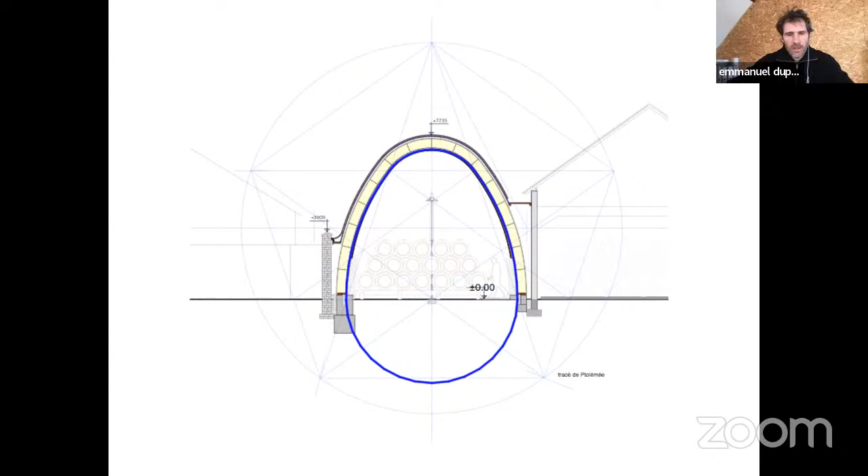To build this vault, we used four raw materials. It means that nothing in the cellar is from an industry. Everything has been made on site, picked locally, and transformed by the hand of man to build the cellar.

So we have wood. The wood comes from around here. We have a lot of forest in the Morvan, which is a region next to where we live.

A straw bale — as I said, winemakers are also farmers, so they have a tradition of growing wheat — and the straw we used is from a biodynamic farm, maybe 10 kilometers away from Puligny.

Stone — the very interesting thing about wine regions is that there are very often stone regions. We're in a way very lucky because vines grow on soil that are made from limestone, so we can use it. It's strong enough to be used in the construction.

And then the last material we use is earth, and that's also from around the vineyards to build. So those are the four materials — very, very simple. With this, and a bit of intelligence, you can build a straw bale cellar.

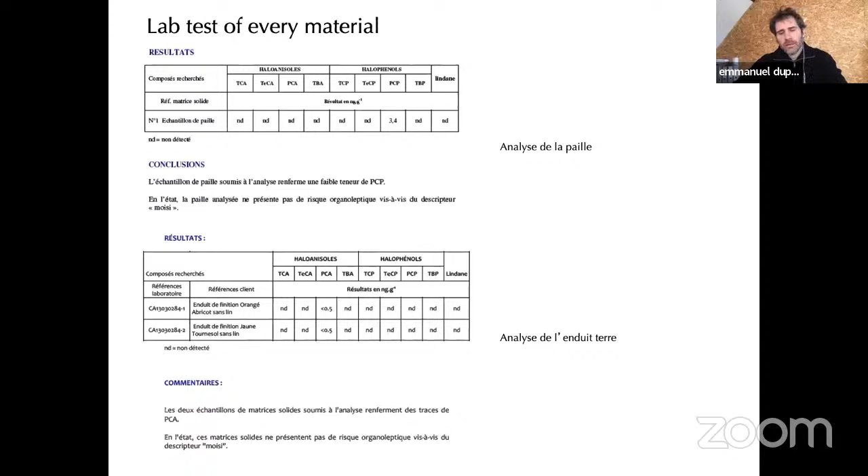Along with the use of natural materials, there's something we wanted to do that has to do with the fact that we have to be very careful of the material we put into this construction: we didn't want to have any glue. It would have been very easy to use glue beams to build those vaults, but there were some problems with glue in the 1970s and 80s because of the components they used, and for the same reasons as explained before.

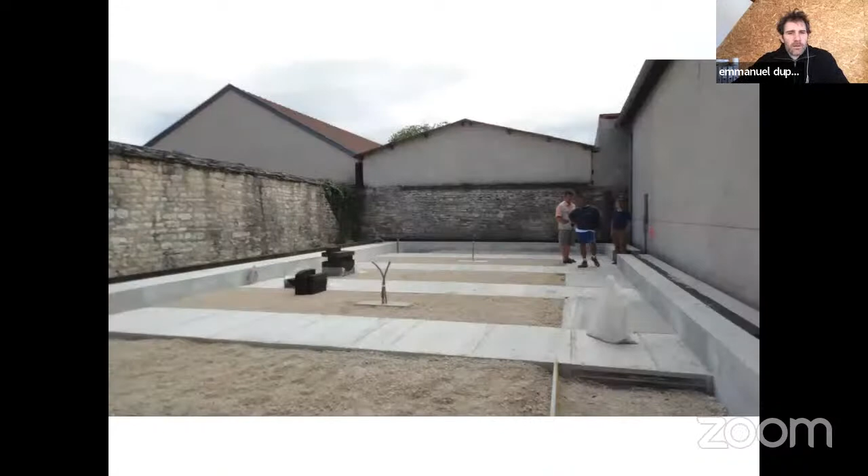So this is the preparation of the site. One of the main principles of the cellar is that it's connected to the earth, so there's no insulation. There's nothing in between the earth and the cellar. As you can see, there are 2 or 3 alleys for the barrels, but where the gravel is, there's nothing, there's no insulation.

So we add a bit of concrete. The concrete we use is a low carbon concrete. We're very lucky here, as the concrete and limestone are made locally, and there are people researching ways to use as little cement as possible in the concrete. So this concrete is low carbon. It was experimental at the time. Now it's actually the law, but 7 years ago, low carbon concrete was experimental, and this was one of the first buildings using it.

The other thing we're using, you can see on the side, is cork insulation surrounding the base of the building. It's another material we use a lot for insulation within the ground, because it replaces foam, a petrol-based material that uses a lot of energy. This cork insulation comes from Portugal. It comes from a bit far, but less far than, let's say, the other side of Earth. And it's quite efficient, it doesn't suffer from humidity. So this is the base on which we've put the arches.

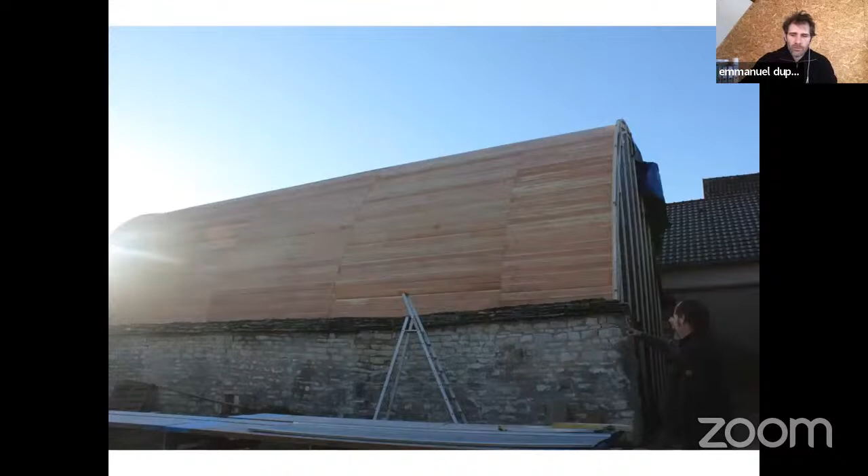So that's the arches being built, and then on top of it, we've put this wooden layer, which is going to be the support for our external layering.

So this is the guy checking the straw. Once it's checked with the lab, and it's checked also for compression and humidity, we can close it up and go to the next phase.

So we're building a cellar. A cellar is very different from what architects do usually. Architects usually make buildings to be heated. This is a building which is supposed to be cold. The buildings we build normally have a very low percentage of humidity, and this is going to be a building with a very high percentage of humidity.

So we have to protect the straw bale, which is the reason why you have this blue breather membrane, which has an SD of 150 meters, if you want the technicality. It means it's a very closed breather membrane. It doesn't let the vapor go through very easily.

This was another challenge for this project because usually breather membranes that are this closed use a lot of foil. But what we didn't want to do is build this egg and then have a foil layer on top of it, because you know how Faraday cages work—if you have a foil cage, then our whole story of energy converging to the center is not going to work anymore. So we had to find this breather membrane, and we had to go to Germany to find it. So it's quite important.

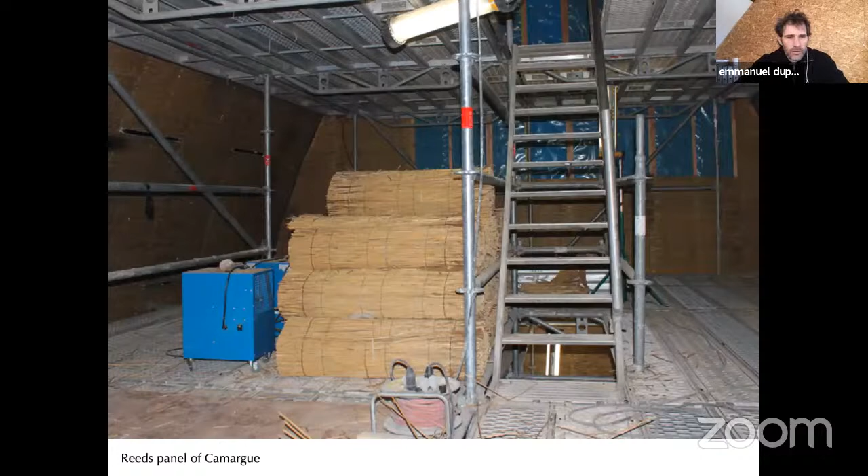So what you see are reed panels from Camargue, which is a region in the south of France that specializes in reeds. Those are going to be the support of the earth render for the finishing of the cellar.

Those were a challenge to find as well, because reed is probably the plant that sucks up the most pollution. So we had to refuse maybe 2 or 3 batches. Every batch was tested on site.

So the reed panel goes onto a wood structure, which is in front of the breather membrane, and will be the support for the earth render.

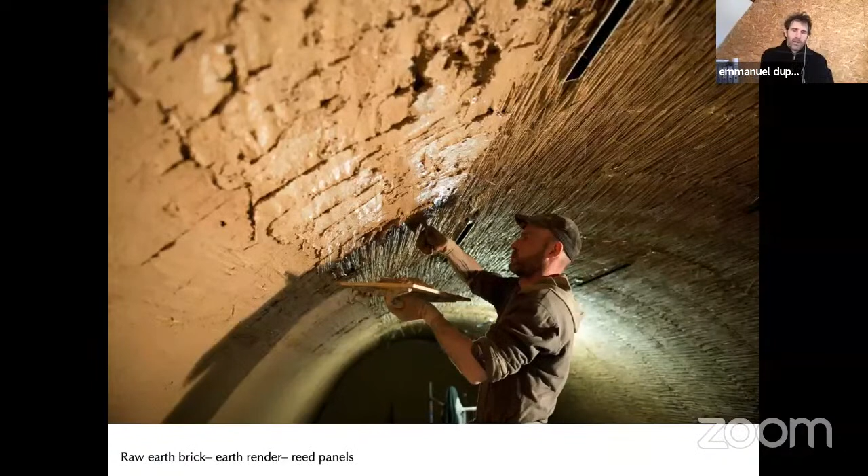The earth render is here for two reasons. As I say, it's a very humid place, so you have to regulate the humidity, and the earth render is probably the best material to do this because it sucks up the humidity and then brings it back when it's dry. That happens also in the compressed brick, but a bit less. It's the earth render which is probably the most efficient.

You can see the little ventilation on top of it. Those are the little ventilations that allow the air to go down. So they go up by the brick underneath and then down at the top of the walls.

So this is the guy doing it. It took them about 6 months to do the whole thing, which is quite a long time. There's just two of them.

What he's doing at the moment is putting the base layer of the render, which is about maybe 3 or 4 centimeters thick. And he's going to apply the finish on top of it.

And the guy that does it is this guy, Ludovic Mej. We've been working with him for a long time. So he's a guy from here. What he does at the moment is he's taking some clay from the site, which is just near the egg cellar, and he's going to formulate the render.

It's just for the finishing, because otherwise it will take too much clay. And you can see we did some experiments on the color. Those are the colors that we can get with the clay on site in Puligny, and then we chose it with the client. It's very interesting, because it means that you're taking the material from the place directly into your building. So it can't be more local.

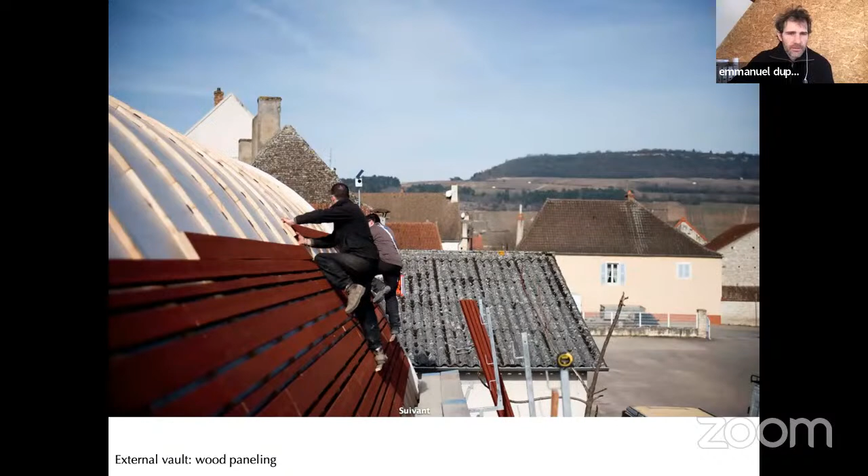So the outside cladding is made of wooden board that also comes from the forest. You can see the forest in the background. So it's not that forest, but it's a bit further away. And it's a painted cladding, painted with a paint that we formulate ourselves, that we make ourselves. Well, it's the carpenter that makes it.

There's a tradition in Burgundy. You would think that it's a Norwegian thing to do, but in Burgundy as well we have it, and I'm sure over in Turkey we have the same. There's a tradition of painting wood to protect it, and they had recipes for this paint which are very easy to do.

And this is the carpenter doing it. So Marion is on site checking it. The paint, it's not much - it's just flour, linseed oil, soap from Marseille, and then to have the color, it's the red ochre.

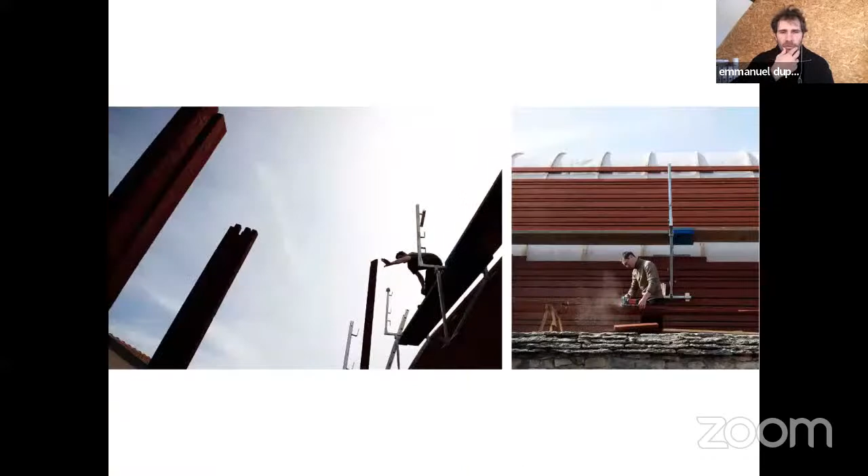Just to summarize a bit the way this egg-shaped cellar is done: you have the outside layer, which is the board, the wood cladding. Then you have an air layer. Then you have a very strong rain membrane, so that there's no humidity that goes into the tanks. That's very important. Then you have the straw bale, the air layer that I talked about, and then the earth render.

You can see this a bit - it's in French, but that's it. So it's 13 layers. So when I'm saying it's very simple, the materials that we're using are very simple, but the way you put them together and the order in which you put the materials together are very important. Every layer has an importance, has its task, and they have to be at the right place. When you deal with natural material, that's the constraint you are in.

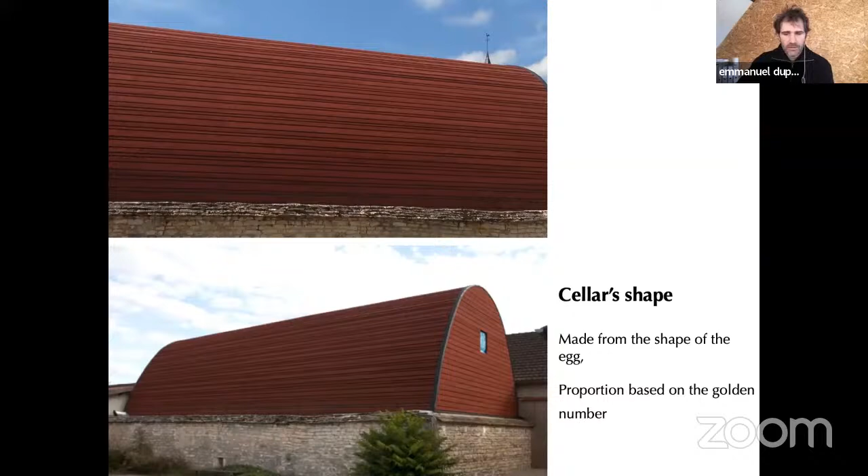There you go, that's the egg cellar with the guys working in it. And that's the outside. So it's a very small project, but it's rather iconic. There's a lot of work put into this.

What we're trying to do now is put all that I've said, all that we're experimenting in winemaking and construction and farmer construction, into more public-based projects. We're building a kindergarten in Chalon-sur-Saône, and our thinking was: why are we taking so much pain in building constructions for wines and testing every material, and not doing it for a kindergarten?

So what we did is, in the competition that we won, we wrote it down that every material should be tested, so that all the kids in the building don't smell or breathe materials that are not good for them. What that did, very interestingly, is that when we started the studies in this kindergarten...

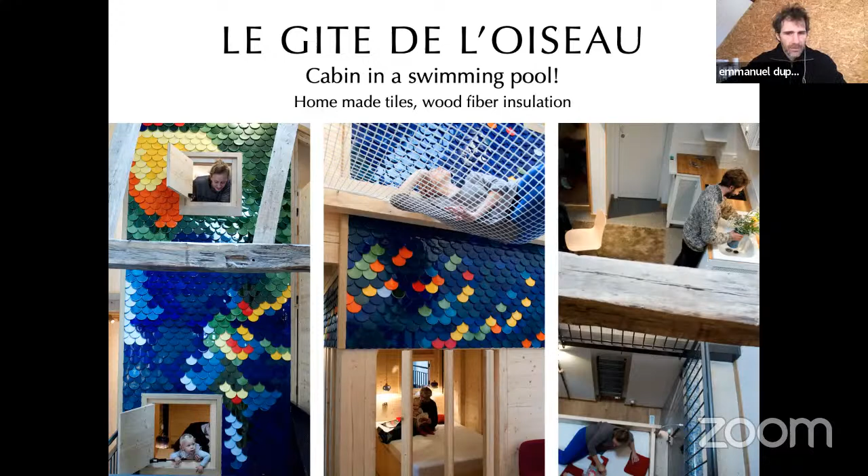So those tiles were handmade. This is me sorting them out. Handmade in a factory that used to make plates around here, it used to be a huge factory that made loads of plates, but not anymore. They had a very small activity, and we went to see them and said, 'Do you want to make tiles for us?' And we made those tiles for this project. Very local, it's plaster. And now the activity starts again because they're doing other small decorative objects like this.

There's a huge challenge of how you insulate. Those buildings weren't made to be insulated, they were made to be just a stone wall, you had a wood fire and that was it. But with the comfort we're used to now, we have to insulate. With the challenge of using less energy, we have to insulate. So this was one of the challenges we tackled maybe 5 or 6 years ago. What we did was insulate with an earth render, to try and have both the insulation and the render inside.

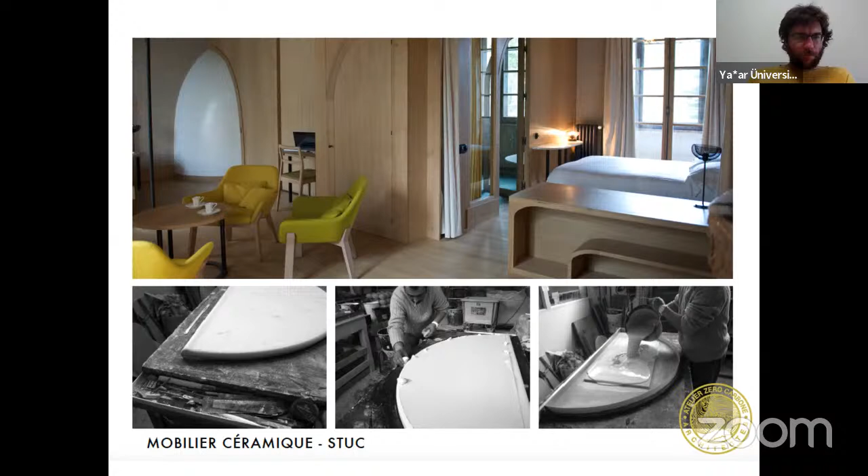This is another project. It's called Les Thermes. It's a bathhouse that we made from an old garage in Chambertin.

The inspiration for this building is the impluvium that you used to have in Roman times. You have the compluvium—you can see them with the bronze on top—and then you have the impluvium underneath. It means you have the rain that goes through, and the atmosphere when you're taking the hot bath, which is the egg-shaped bath you see at the back.

The interesting thing about this project is that all the materials are raw, but kind of luxury. So you have the stone, the bronze, the wood, but nothing has been industrialized in this building, and it gives you a sense of aesthetic for the building.

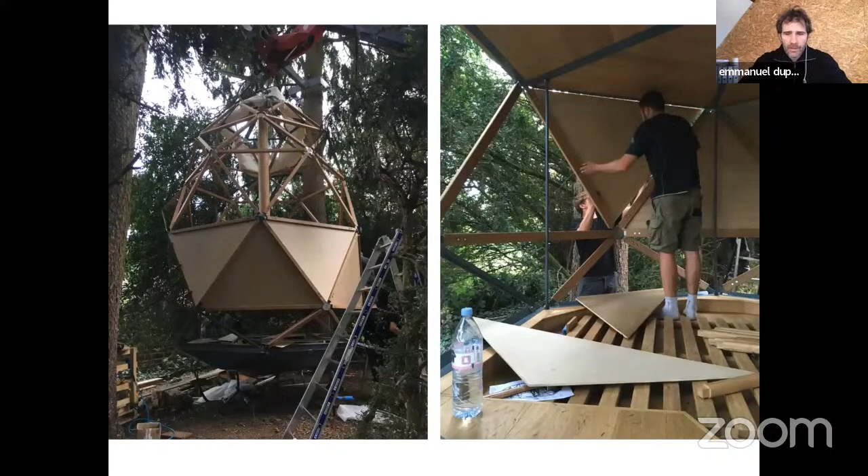We wanted to have the same effect on this cabin. So what we did is design this object, made of a geodesic structure of oak tree, with a bit of metal for the structural part to hang it up, and then we put a tent over it.

And then we had those wings made that open up with the heat and close up with the cold. It means when it's very warm, it opens up and lets the air go through, and when it's cold, it closes up and the air goes through less.

This was made because we found it's very funny actually—we found this system in warehouses where you grow vegetables. You have those big warehouses with windows that go up when they need to ventilate, and go down otherwise. So it's not something we invented, but we use it for a place where people can live.

There you go, that's like a pomme de pin. And then maybe another fun project. I'm going a bit faster.

Another project is this Cocoon Cabin, which stems from an old technique, maybe from the end of the 19th century when there was a big industry—the technique of very, very thin glass tiles on a metal structure.

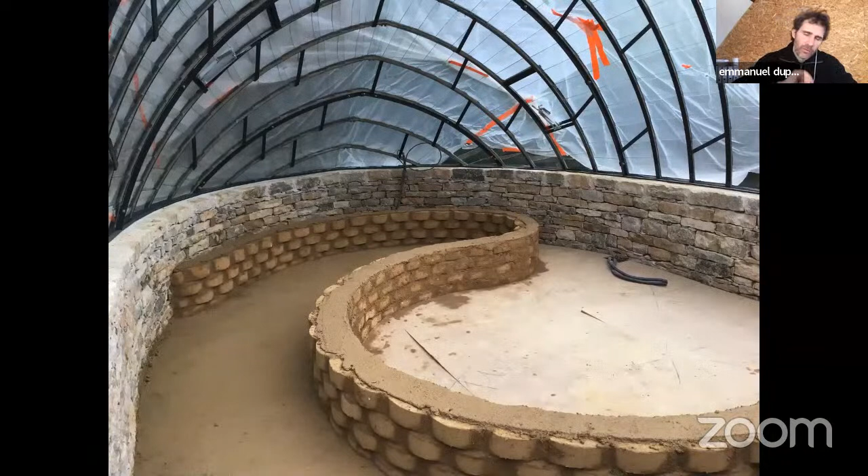The idea of this project is that it's a double layered cabin. You have a first layer, which is protection from the rain, which is this glass house. And then you have another layer, which is this base that we built, where it's all made of earth, and that's where you have the warmth. The soil is made of earth, the base is made of earth, the dome is made of earth. It means you have a very cozy atmosphere inside, protected from the rain, because we use only raw earth. So when the rain hits it, it would be catastrophic. So you have to protect it.

We actually made those bricks ourselves. We made ourselves a few molds made of zinc, and then we made the bricks. That's someone from the practice, Boris, making bricks. It took us about a week to make all the bricks. So what you do is put them in, and then you just let it dry. It's a very, very simple technique. A lot of people use it in North Africa, maybe in Turkey as well. In France, it's been completely forgotten, so it's starting to come back. It was interesting for us to do this.

Clay, mainly clay. So there you go. You have the earth, an intimate little hut where you have a bed, a little heater, and then you stay there overnight.

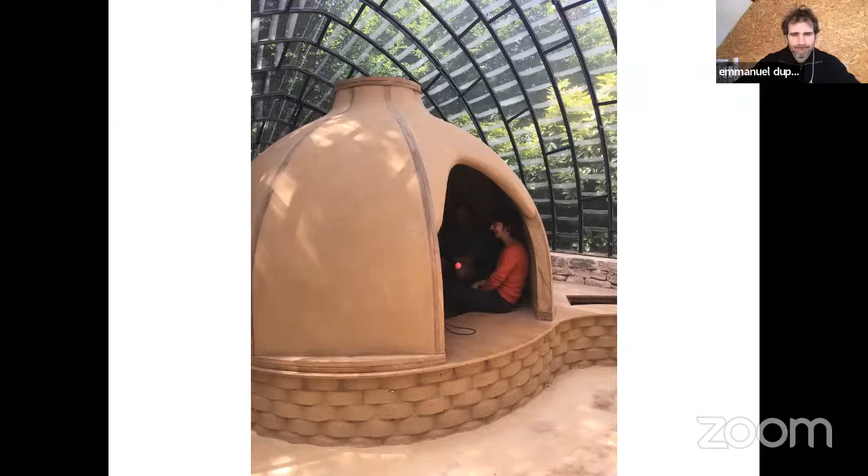Another experiment. So you know how we use straw bale in all our buildings, usually in frames, like the egg ships. What we wanted to experiment on in a small building is structural straw bale, which means it's the straw bale that holds the roof. We're not the first ones to do this, but it's not very common, so we tried it.

So what you do is pile up the straw bales and then compress all the piles so that it becomes so compressed it becomes structural. The idea is that you use even less wood, only straw bale, and you also avoid any thermal bridge because you have no structure. So it's wonderful on paper. It's a rather heavy technique, but it's pretty efficient because you have the straw bale, then you have the lime render outside. It's a lime earth render. You have to put some lime, otherwise the render is going to wash away.

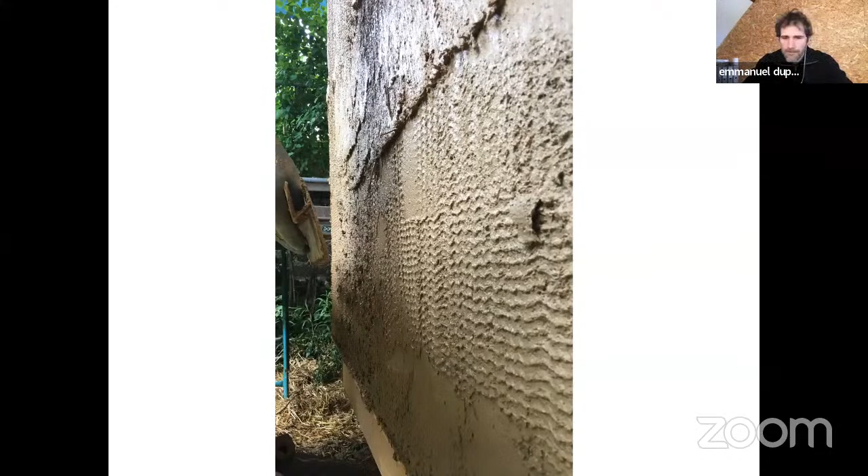You use local guys - this is our roofer and our wood maker. What's interesting is that in France we have the Compagnons du Tour de France, guys who have spent their life learning their craft. But the only place they usually get to use their craft is in patrimonial or conservation buildings - churches, mayor's offices, etc. They rarely get the occasion to use their real know-how on other buildings. When we come and say 'you're going to work on a straw bale house like this,' does that interest you? They're so happy, and they have a way of thinking that helps you a lot on how to put things together, because they know the material. You really shouldn't underestimate this - if you want to be sustainable, you have to work with these guys.

So we have an earth render, which is inspired by a Japanese render on reed. The Japanese are really strong at this work, but they're not the only ones. There you go.

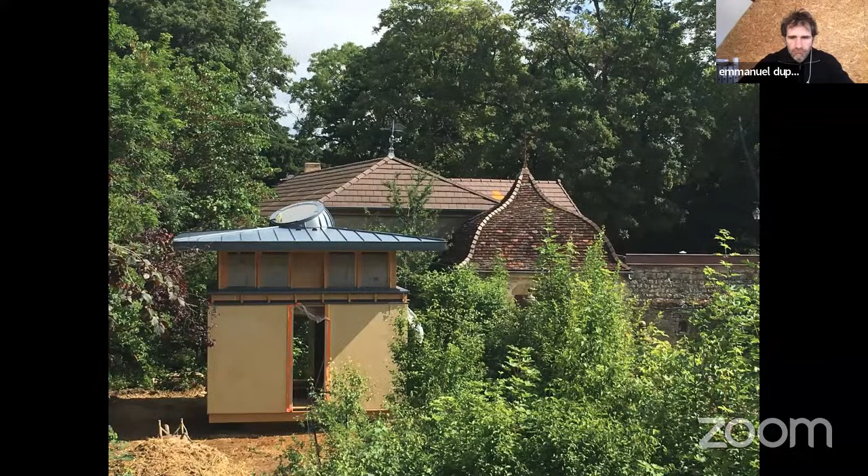Okay, I'm going to maybe wrap it up. This is just a small one - another project we could talk about. It's a tasting room which is suspended in the air, in a building in Chambertin. Nothing special about it, it's also a straw bale insulation. The only thing is, you should have fun when you do architecture, or at least that's what we think.

There you go, I'm going to go through the inside. This illustrates really the way we want to work: the hand has to be near the material, and then the material does your architecture. I'm just going to finish.

So I'm just going to finish on something I did maybe three weeks ago. We were invited to Saint-Pierre-et-Miquelon, a small island on the other side of the Atlantic, which is actually part of France - a French department. We were asked to go there because, unfortunately, Saint-Pierre-et-Miquelon is going to be submerged, meaning the sea is going to rise on top of it, at least on the island of Miquelon. That means they're going to have to move the village, because the village is on a small isthmus, maybe a small beach - which is interesting, because the village is where the sea is going to rise, and so it becomes the new village. We've been asked to go there and help them move the village. The reason they asked us and other architects is that this is a result of climate change.

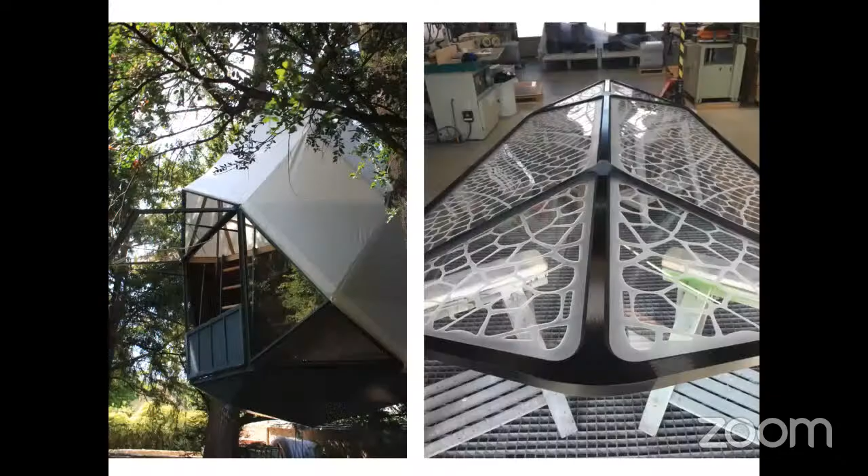Actually, I have two questions. The first one is about the glass cabin—I was wondering how you managed to join the glass tiles to the metal structure, and how you dealt with the runoff rainwater on that one. And for the—yeah, that one, exactly, not that one, the one after that. Yes, this glass cabin. And the second one is about the straw bale cabin you showed us. I was wondering, I know you didn't use any tie beams, but did you use anything like metal wires, for example, to bind the straw bales?

Okay, tie the rows, I was wondering about that. Well, first question for the tile, for the glass tiles.

Yes, it's actually very, very simple. We call it a mastic - I don't know if you have this. It's like a paste, water based. So the tiles, you just put one on top of the other, like normal clay tiles. The metal structure has a little edge on which you put the tiles, and then you apply the mastic, like a paste that we all used to work with. It's called macun in Turkish. Maybe it's like Crystal Palace putty - I don't know in English, but I know it in Turkish. So that's the first answer, and then for the straw bale...

So this guy here, you're talking about, for example, the white line that you see. Yes, I see. Okay, so there's no metal - well, there's a metal base on which we've put the walls, because as you can see it's slightly suspended in the air, so to do this we had to use metal.

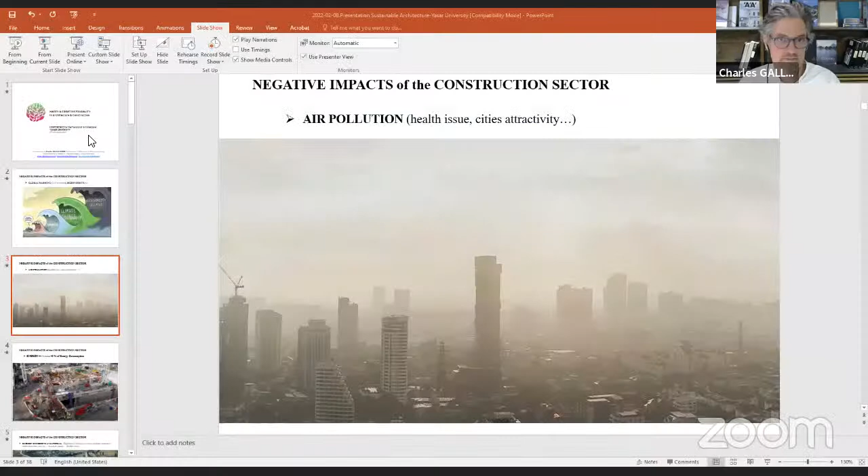I'm sorry I couldn't participate in the previous conference, so I don't know exactly what you talked about, but I just heard the end talking about frugality and sustainable architecture. So let's continue, but this time in Asia, Southeast Asia.

I put this title, Happy and Creative Frugality in Architecture, because this is a group of persons who constitute this new movement, let's say, and I'm the representative for Vietnam and Cambodia. That's why I would like to introduce this movement to the students in Turkey, because it seems there is no group in Turkey yet. So maybe it's a good occasion to create a group for frugality.

Before that, I will present two projects of T3 Architects, my company in Vietnam. I would like to remind of the context, even if we all know about it, so I will go quickly on it, but it's important to get this information in mind.

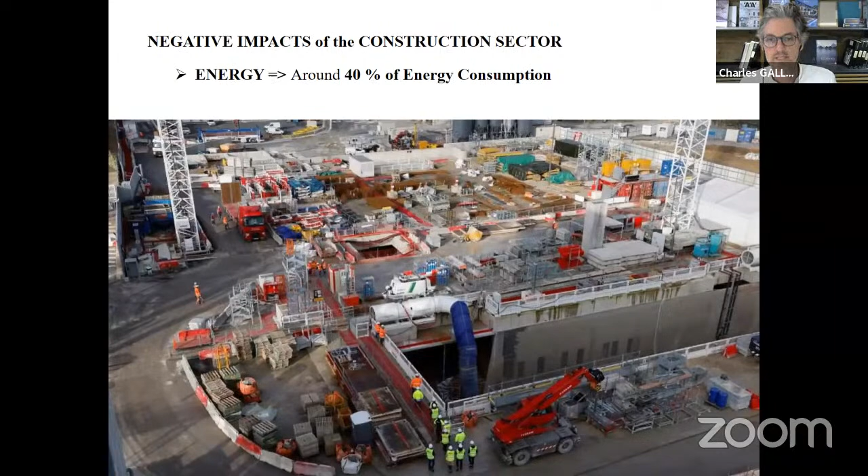Then, in terms of negative impact of the construction sector, there is also the carbon emission of the material itself. When you choose a material, you have to keep in mind that you need some energy and some carbon to produce this material, to extract it, to produce it, to transport it to the construction site, then to build, then to demolish the building after 50 years, and then to recycle. All this needs carbon, produces carbon emission. So the challenge now is how to reduce the carbon emission and try to make low carbon buildings.

During rainy season, which means 4 months per year, we have flooding, and it's worse and worse, even though the city is now very modern with many good facilities. Because of urbanization, we don't take enough consideration to preserve the natural soil. When there is a big rain, the water rises quicker and quicker, and now some streets are underwater sometimes.

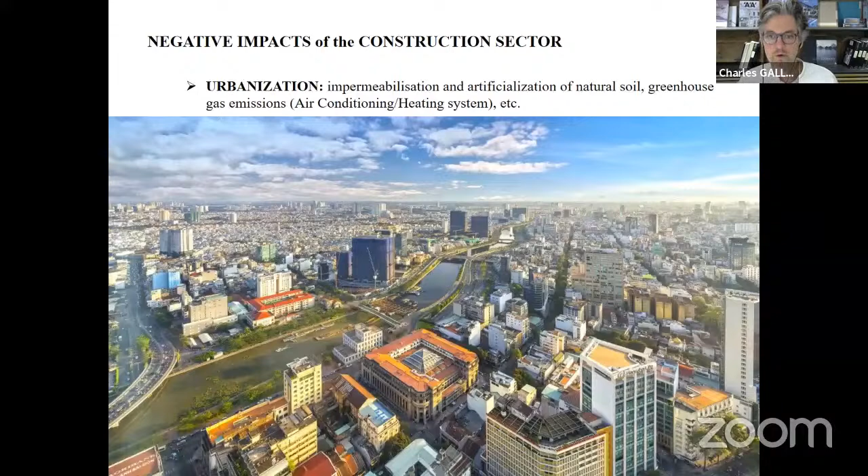Then the last negative impact I would like to mention is what we call greenwashing. Today many architects, many investors, many real estate people will tell you, I do green buildings. But if you look in more detail, it's not green at all, except a few plants on the balcony or some solar panels on the roof—but that doesn't mean your building or construction is green.

You really have to be careful and understand what real sustainability or low carbon building means, and avoid going for this kind of fake green architecture, which is everywhere now on the advertising panels of real estate developers. And I'm sure it's the same in Turkey.

So what we want, the new approach, is to go for a more sustainable approach, and to build cities and architecture that are more sustainable, and also more desirable. It's important—it's not only a question of engineering, it's a question of making a city where you feel good, where you have pleasure to live, and where you don't suffer to live there.

So the transport will need to work properly. The air quality should be nice. You need many parks and green areas to go out and enjoy with your friends, etc. And then also bringing the frugal approach—it means doing more with less, generally speaking.

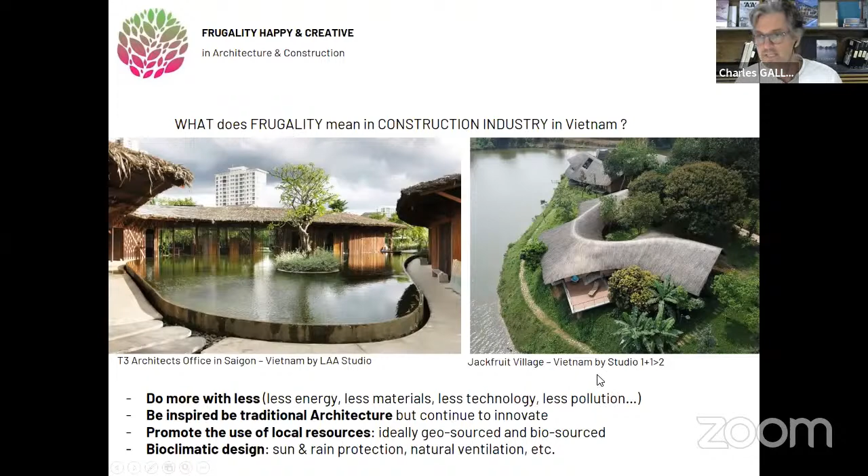Okay, perfect. In France you have a group of frugality in every province, and now, I read recently, there are 8 international groups. So we are one of them, but maybe Turkish soon, or maybe it's done already - I don't know.

Those three people - one is an architect who was always involved in sustainable architecture. Dominique is more a teacher, between France, Germany and around Europe, promoting sustainable architecture for 20 years already through magazines, books and conferences. And Alain Bornarel is an energy efficiency engineer. So this collaboration allows this movement to be quite powerful, and I hope it can grow all around the world to change the mindset of architects and make buildings more sustainable. That's the goal for all of us.

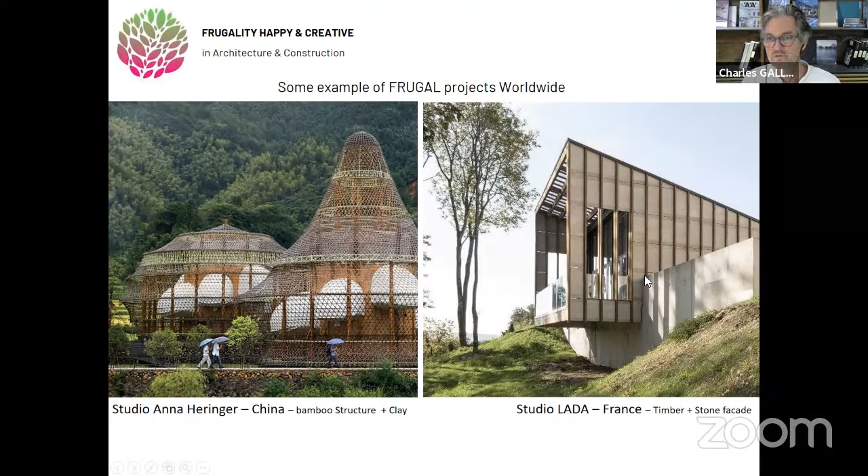It's a very contemporary architecture using wooden structure from local wood, not wood coming from another part of the world. Then they use stone to make the facade, a local stone. Of course, you can use a little bit of concrete where it's necessary. We don't say you cannot use concrete or materials like this, but you have to use the minimum concrete possible and only where it's necessary. If you don't need it, just use biosourced or geosourced material.

All the insulation of this roof was made with rice husk, the skin of the rice. We use 20 or 30 centimeters of rice husk to insulate the roof. Another project from another studio, doing a house in the countryside using only local bricks, which allow natural ventilation and decent comfort even under a tropical climate.

Just some examples of frugal materials you can find in Vietnam. Some clay, which you can find everywhere in the world, but you have to study carefully the clay you use and how you make your walls with it. This is the rice husk I was talking about, which we insulate with in Vietnam.

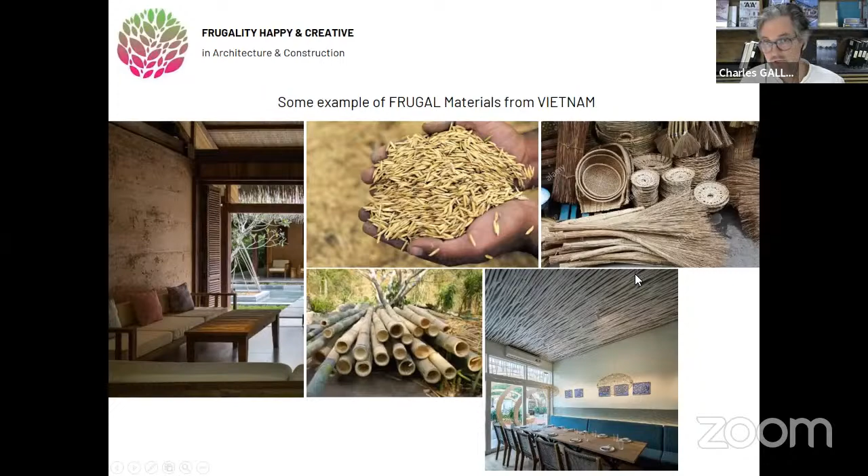Now I will focus more on two projects we did with T3 Architect. One is a dormitories project to welcome students, and another is in Saigon city center, an office building. Very contemporary, but using only natural material. So I will show you.

I'll start with the dormitories. This is 40 kilometers from Saigon in the countryside, but the city will grow around, so it's still countryside, let's say. The owner has the house here. It's a family, French-Vietnamese, living in Vietnam. They have some horses here.

Here they have a place, a kind of restaurant with a pool. They have a small eco lodge with bungalows over a pond. And here they produce some clean, drinkable water. We just built this small building to welcome international and Vietnamese schools to make green classes for a 3-day trip, where they spend 2 or 3 nights. They have many programs around sustainable construction, permaculture, farming, etc.

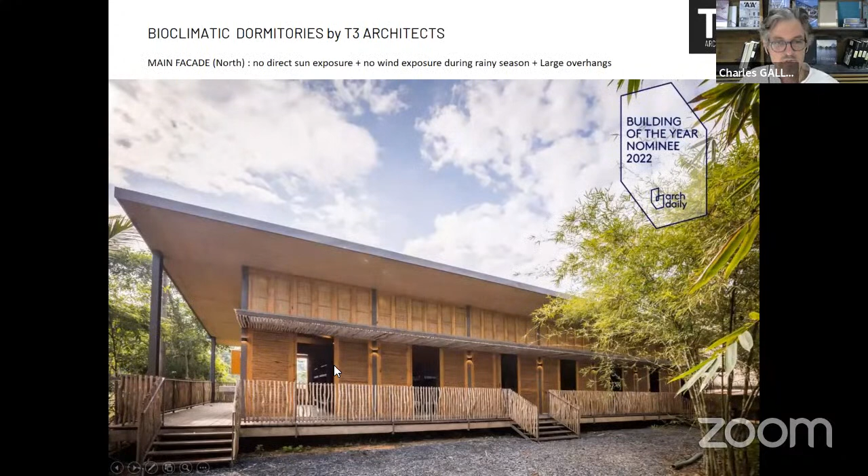This is the goal of this project. So we are in... I'll just continue. This is the main facade from the ground floor, let's say. Just for information, we've been nominated this year on ArchDaily, even though this project is frugal, very simple, and even low cost. So just to show you, you can be on the biggest architecture website with a very frugal approach. This main facade is the north facade.

We put the main facade on the north just to avoid getting light. In France or Europe, you try to get light from the south, but in Vietnam it's the contrary. You try to avoid direct light, because if you have the sun, it means it's very hot. So we are on the north, where you never have direct sun on this facade. And we have a very large roof to make sure the sun never touches the facade, so it's always under shadow and always fresh. We even add a pergola here to make sure at any season of the year, the sun never goes inside the building.

As you can see, all the rooms - 1, 2, 3, 4, 5, 6, 7 - have a double facade with openings on both sides. This creates a natural airflow, because one facade is always more hot than the other, so naturally it creates airflow through the building. I think I have a section to show. This wall, which is south, is sometimes a little exposed, so it's a little more hot, so the fresh air from the north goes through to the south. During the night also, the airflow can happen. So it's very important, when you want natural ventilation, to have two opposite facades with openings.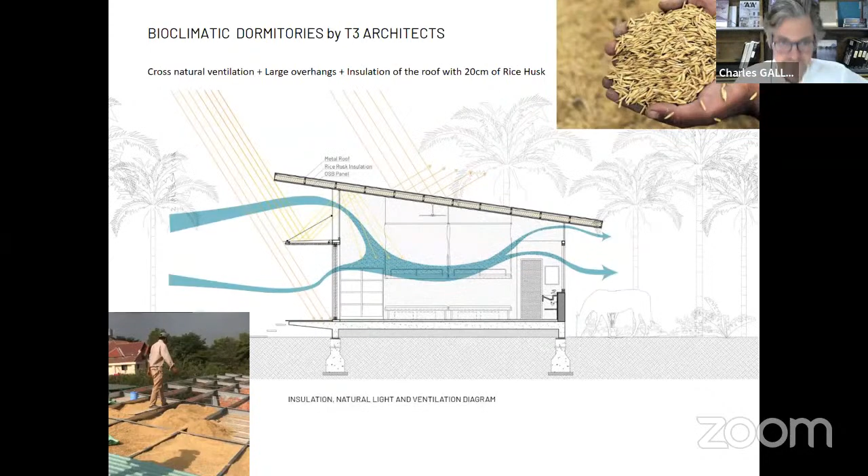So this is the layout, quite simple - it's for students, so 4 bunk beds, 8 people per room, with some toilet, some sink, and some shower, and cross ventilation through the building. Then we have a terrace all around just for enjoying outside.

You can see the back facade - always we use a wooden frame and bamboo, and you can ventilate your bathroom and have the view of the landscape, of course. Of course, we kept all the bamboo and the trees around when we started construction. We didn't cut any trees.

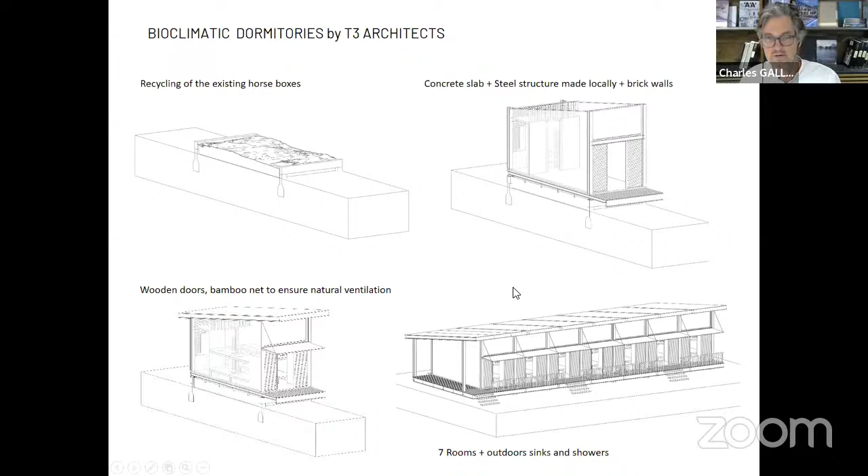And you can see how we did it. We had to demolish some existing buildings, as I explained before, so we kept those destroyed bricks to make the building 50 or 60 centimeters higher than the natural soil to avoid flooding. Then we built the steel structure and some brick walls, then the facade, then the pergola and the roof, and then we duplicated it 7 times because they wanted to welcome 2 classes - around 50 students plus teachers. It's very successful now - all the schools of Saigon are going there to spend time and discover this part of Vietnam.

Inside, you can see it's very frugal also, just a concrete floor.

So it's very fresh when you walk on it. So you use the concrete where it's useful. As I told you, it's strong. You can keep it for long. It's resistant to water, and it brings freshness inside.

And then all the rest, the walls are covered by lime plastering. So we don't use cement, we use only lime and sand. And the color of the sand gives the color of the wall in the end, of the plastering.

And then we design some beds in bamboo because there is a lot of bamboo in Vietnam. There are many types of bamboo, so depending on what you do, you use the right bamboo. For furniture, this one is good. And we always try to avoid adding chemicals, so we try to avoid any treatment with chemicals even on the furniture.

Then you can see we use only dry toilets, so no water. Even if you have 8 people inside, it works very well. So we build the box, and then you have some rice to put when you go to the toilet. And then you have a door on the back side, so for operation, the owner and the team can open it without going inside the room and take the box once a day. And they use it for the compost, then they do agriculture.

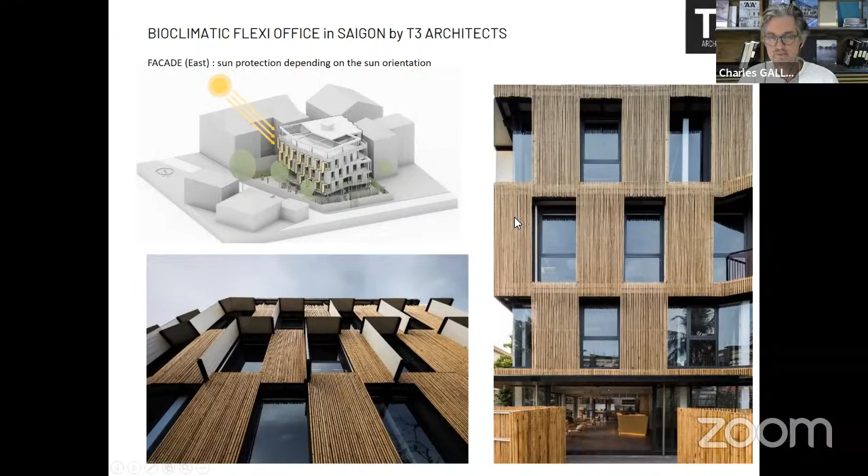Some other picture. And here another big challenge we want to bring to this project is, before you had a full glass facade with only 2 small doors. We told the client, let's create a nice garden around the building again. So we break the concrete floor, we break it to plant many plants, tropical plants. So it was at the beginning, but now the plants grow very quickly in tropical climates, so it's already much bigger. And let's keep the ground floor totally open.

So let's remove the air conditioning of the ground floor, and we just preserve the cross natural ventilation by keeping the windows totally open. You can just close a few hours per year. So it's sliding doors for when there is a big rain and you really need to protect the inside. But normally we have even a roof here to make sure, even if there is rain, there is no rain inside.

So you can see other pictures. So we work again with energy efficiency engineers to prove to the owner that we don't need air conditioning. He didn't believe us from the beginning. He told us, no, it's too hot in Vietnam, we cannot. We say, don't worry, we have three floors above. It is a very good thermal insulation to get 3 floors above you. Then we get this additional roof, so there is no sun inside your building.

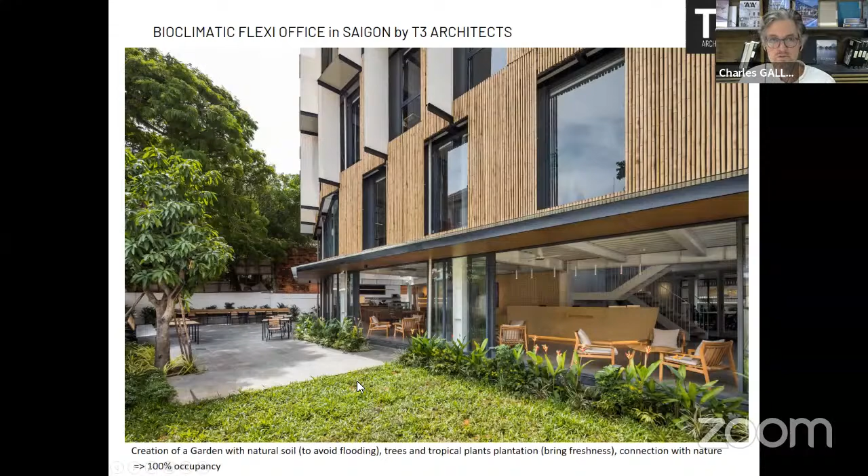So even we did also interior design. We not only do architecture. So when we do interior design, we promote local material. So the ceramic tiles are produced in Vietnam. All the tables are made with solid wood. It's not fake wood. We even go to antique shops to find some old furniture, and we renovate to make the coffee shop, for example.

Then the existing structure was there. So of course we keep the existing to save energy. If the structure is there, we keep it.

Just to show you also, we try to bring some natural material inside a modern style building. So it creates some contrast between modernity of the steel structure and some walls with lime plastering again, only lime and the sand will give the color of the wall. So you have some texture on the wall. All this is made by wood, solid wood, and rattan, made in Vietnam as well. And all the decoration is from a local craftsman to promote local know-how.

And the goal is also to make proper air quality inside the building. So we want to avoid using chemicals. So even if we use plywood, it's plywood with grade 1, so with a minimum of chemicals inside. Whereas most projects use MFC wood, you know, the panels with a powder of wood full of glue and full of chemicals. So we don't use it anymore, even if it's cheaper.

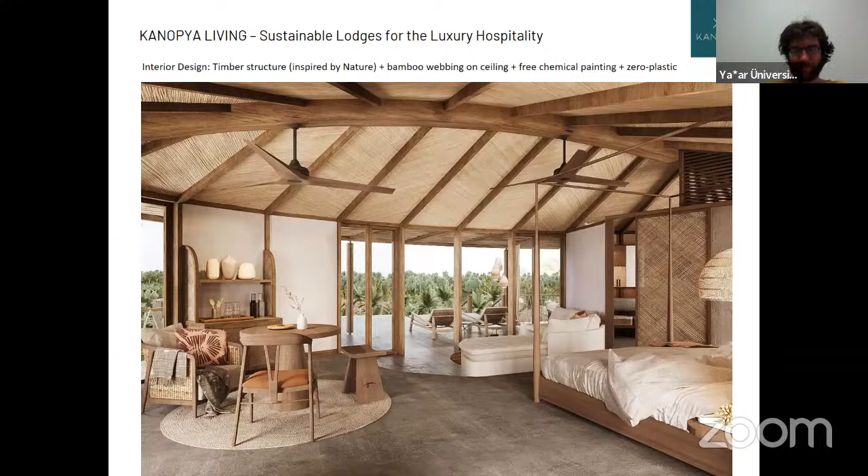No. Second conference, yeah, but there were not more questions than the first. It's usual. So I will ask then.

One of the questions I had was about the compost toilets you're using in the dormitory. The owners accept it easily because they chose it, but for people coming here, do you know how they feel about it? First time they are afraid of it, but once they use it one time they realize there is absolutely no difference, no bad smell. And because you don't need to manage it afterward, everybody is happy with it.

Some international schools come here with kids who pay a very high cost for school fees, and they are all happy to use these dry toilets. So no problem at all. Good to hear, because I'm not sure any of the students had heard about it before. It's more psychological - you say oh, it's not clean, but when you use it, you realize there is no problem, and you don't use water. That's the main difference. In certain countries it can have a big impact - when you are missing water, it's a good way to save water. I don't say we can use it everywhere, but if it's properly managed and designed, I think it will become more and more normal.

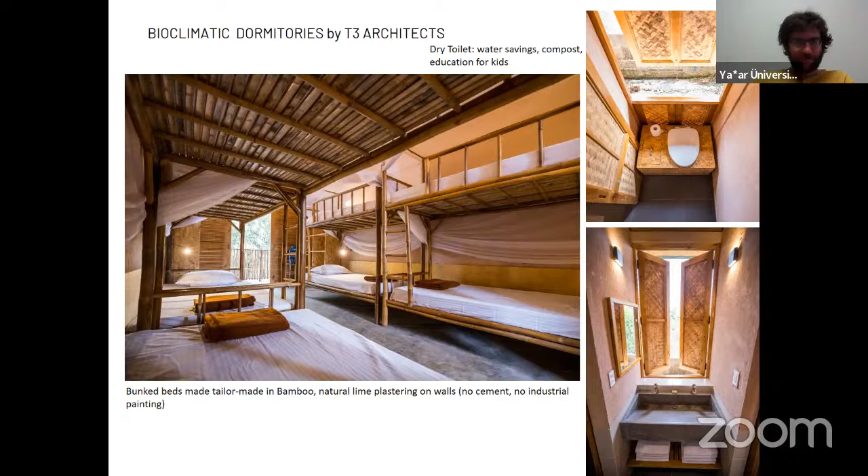Gokab, you can ask your question please. Hi, first of all, thanks for your presentation. I'd like to ask - you designed a second roof for all the luxury resort buildings in the last pages of your slides, but the outdoor toilet didn't have one. What about the solution for that?

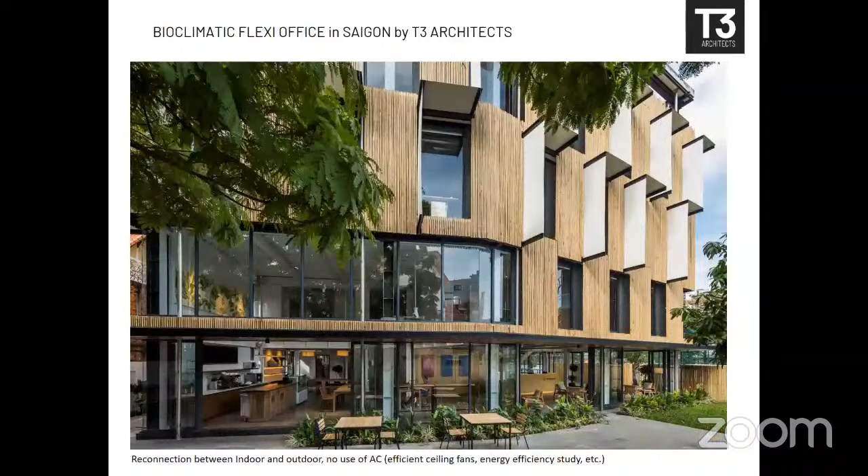I'm not sure I understood the question well, I didn't hear it clearly - this project has an outdoor toilet? You mean the main building has a second roof for covering the facade, but the toilet doesn't have one - what's the solution for that? To cover the facade - for the toilet, the rain doesn't come here.

In 5-star resorts now, people are looking for a special experience. So if there is big rain, okay, you have 5 meters to go, you take an umbrella and cross the bridge - it's part of the experience. People will pay 1,000 per night for this. So no worry, they accept to play the game. Usually when there is big rain, it doesn't last too long, so in the worst case you just cross a few meters.

No worry, but we can imagine creating a pergola or something to cover it. The client didn't request it though, and I think it's a good experience. In our office now, when we go to the toilet, we go outside, and when it's raining, okay, you run, you make exercise.

No, we just use the existing ones. We study carefully the existing structures. I will try to show you. We had this kind of concrete planters. The first idea of the previous architect was to put plants here going down, but with the irrigation system, as I told you before, it was maybe a bit too high tech. It means you have to consume energy to put plants, and during dry season the plants will die for sure. During rainy season you will have too much water and the plant will also die. So we just said, okay, let's remove—we keep the planter but we don't plant anything—and we use this to attach the bamboo facade on it, a vertical bamboo facade.

And then for each window, we try to get a nice design to protect every single window as much as we could. We studied with software like SketchUp, or even basic software, where you can see at different seasons where the sun is coming from, and you just calculate the size of the shading to make sure there is no sun coming inside.

So I think every project after should have a different approach. And we did—I have many others, of course, to show—where we use ceramic tiles on the facade, produced in Vietnam, for another type of project. So the main idea is which kind of material to use for which purpose.

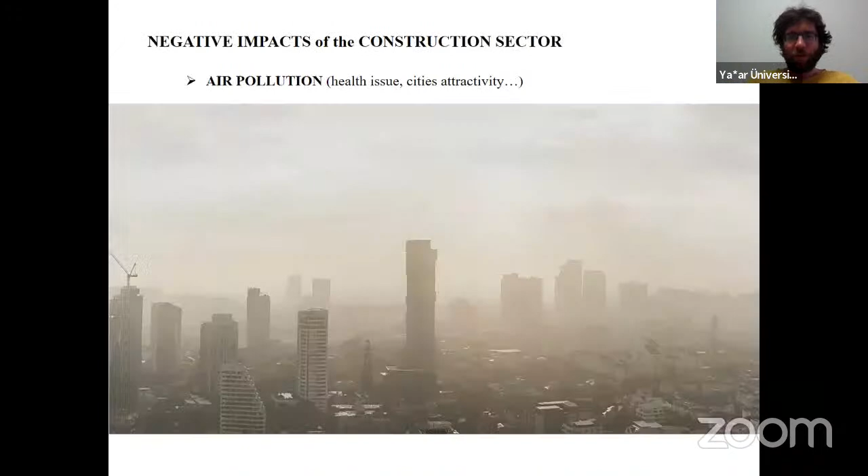Görkem is asking about bamboo and insects—is there no problem with insects like termites or anything?

Yeah, so that's why for every use, if you need bamboo, there are, I don't know, 100 types of bamboo in Vietnam. So for the one most resistant to insects, we took one quite resistant naturally. Then either you put it in the mud for a few weeks to make sure the mud kills the insects inside the bamboo, or you burn a bit of some part of the bamboo to remove insects, and then you put a low layer of protection against insects and sun. So we took a bamboo very resistant normally to be used for facade, and then we have a small layer to be insect repellent.

So a little bit of chemicals, but only outside, so there is no risk of having bad chemicals inside. But we took the right bamboo to make sure it will resist well. If you took the first bamboo you find in your garden, of course it doesn't work—after 6 months it disappears, eaten by termites and mushrooms and any insect.

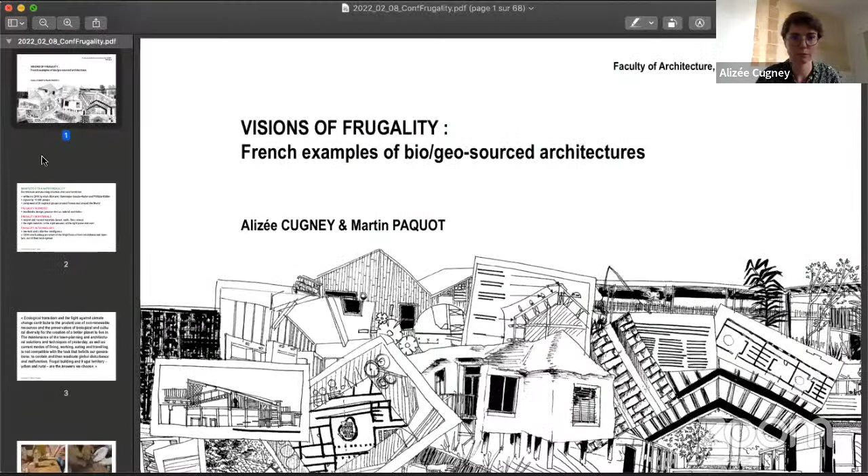We are going to talk about mise en scène analyses. You see, so maybe at the beginning we don't have the right pace, but we will find it at some point, I think. The title we found with Martin was Vision of Frugality, French example of bio and geosource architecture.

But first, I was asked to say a few words on the frugality movement that started in France, but also around the world. Actually, it started 4 years ago, almost day to day, when Alain Bornarel, Dominique Gauzin-Müller, and Philippe Madec wrote a manifesto entitled Manifesto for Happy Frugality, Architecture and Planning of Urban and Rural Territories. Their starting point was that, of course, you know it, I believe.

Construction, in a broader sense - building, road, infrastructure, and everything - contributes to global warming, pollutes the air and the water, artificializes the ground, and produces a lot of waste. So what we are doing as architects is actually a big part of all the environmental issues of today.

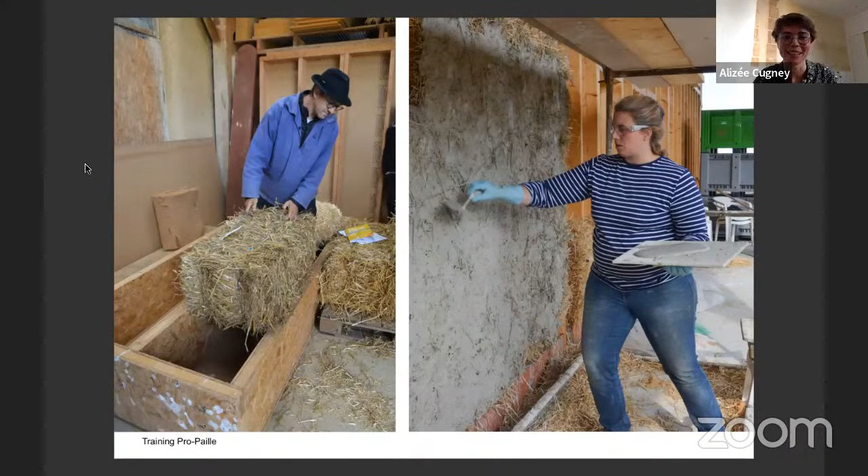Then I did the postmaster's with CRAterre in France. It's over 2 years: the first year is more about theory and some exercises also with hands-on, and the second year is more about the physics and experiments that we want to develop.

It was really interesting to have this study in a laboratory, to really understand how earth was working at the molecular scale, but also how it was working on site at a bigger scale.

This was a rammed earth training on how to renovate an old house near Lyon.

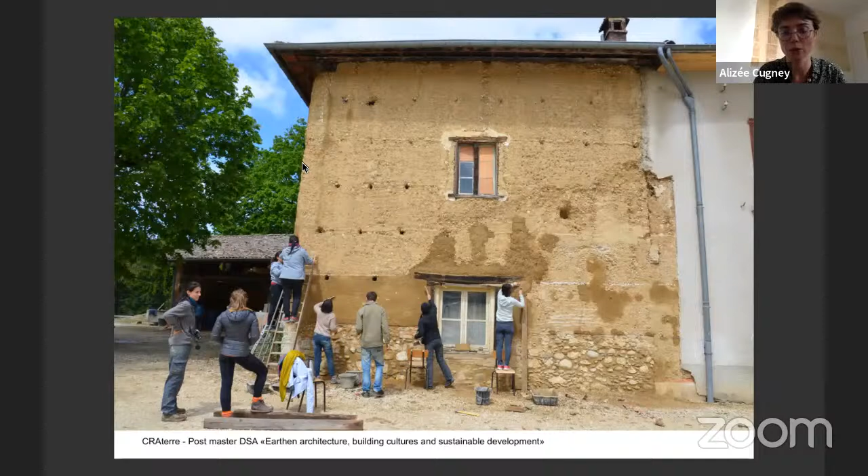CRAterre was set up in the 70s, I think, and they really wanted to combine all the knowledge that existed on earth construction in France and also abroad.

What was interesting also in this training was that we learned how to recognize the earth, how to analyze it, and then depending on the soil you have somewhere, you can see what technique you can use, depending on its composition and also on the climate, the humidity, the dryness.

I think there is one third of the inhabitants in the world living in earth architectures.

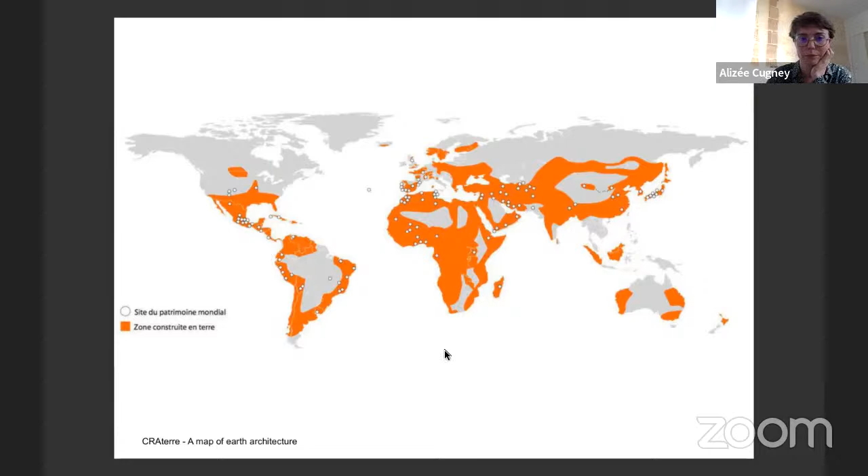I will talk more later about adobe. And here I am in Bordeaux, and Martin is here in Paris.

What really interested me also during these studies was all the sensitive sides that you can develop for a project. But even before a project, like when you are analyzing the earth, how you can rely on your senses to understand it, to build with it, to create also spaces that have a certain ambience.

And I had the chance to collaborate with Anna Heringer, who is here, and her work is really amazing because she's shaping the projects directly in the earth model. So it was really fascinating to work with her.

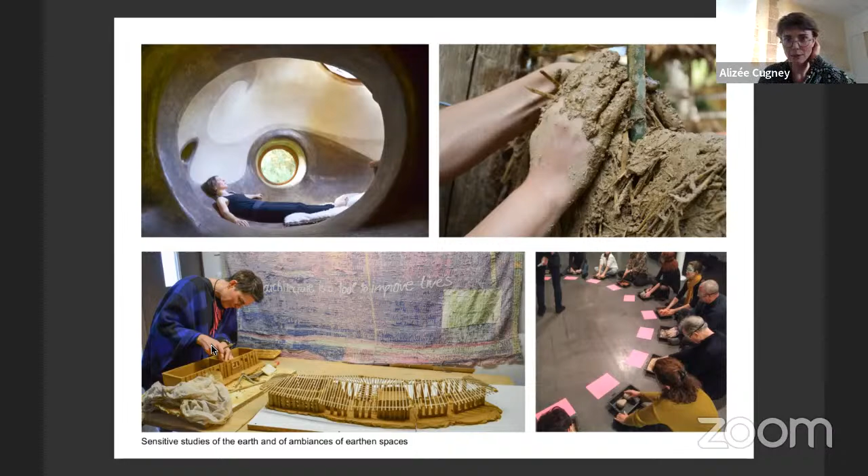And now this is Martin's experiences. We have a common thing, Alizée and I: we did a lot of things outside of school during our studies because the regular curricula was not enough or didn't meet our expectations. So of course we wanted to do something more hands-on.

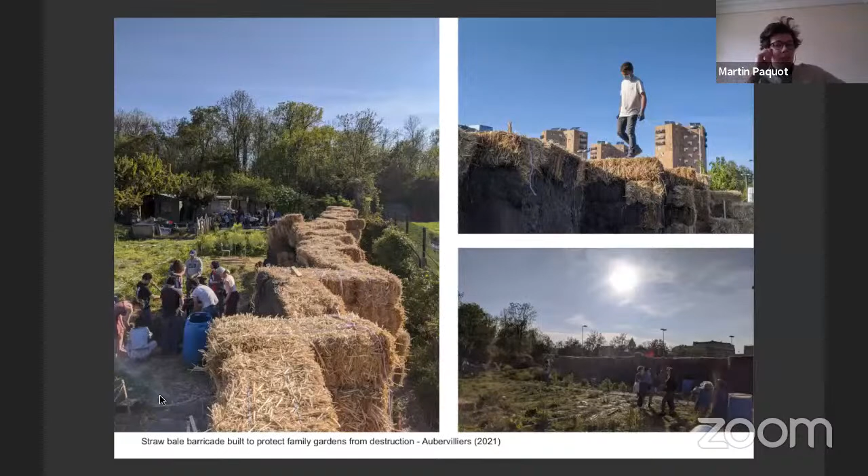Can you go on to the last slide, please, Alizée? I don't know. Yeah. Yes.

And just to show that there isn't just straw for me, wood is nice too. There is another project, a participatory construction for a small pavilion in a school. The idea was that they built a new school and had to cut trees, but they kept them instead of throwing them away, so we could later carve the trees to make beams and posts. We squared them with just axes and no electrical tools, in the really old or traditional way, with an axe and everything.

I will show you a picture of the building completed later on, but it's also really nice to do things with your hands, and as Alizée was saying, the body's way of handling the tools and handling natural materials. It's really great, simply, I think.

And it's me after that, or it's you? I don't remember. It's me. Okay, just as Mathieu was talking about it.

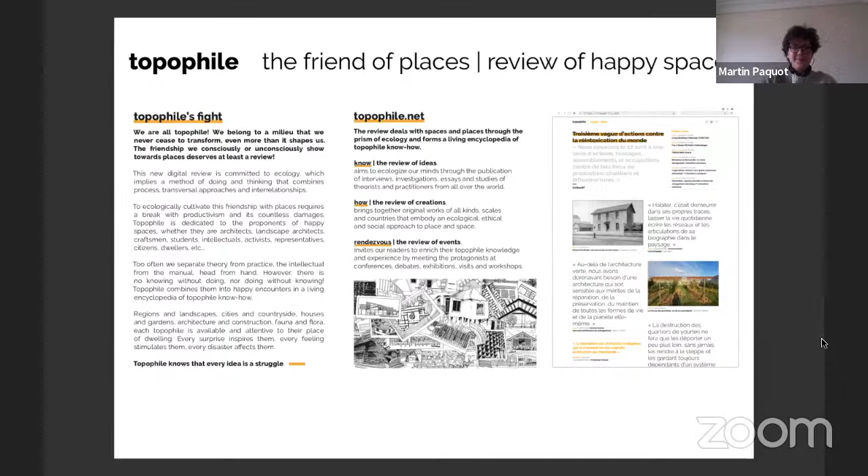Yes, of course, it's kind of new because the bale, the kind of machines that compress the straw to make bales, is new. It's from the late 1800s, so like 1860, 70, we don't exactly know.

But in a country, the Sand Hills County in Nebraska, so in the middle of the United States, there was a land called the prairie, with no wood, with no stone, but just grass and hills only. And people came here and they had to live somewhere to put a roof over their head. And there was grass everywhere.

And they had, because they were farmers, they had a baler. So they said, maybe we can just compress the hay, the weed, and make like big bricks of hay. And they did it, and they put it together, and they erected walls, and they put a roof on it, and then we were able to build with straw. Just straw. It's kind of amazing.

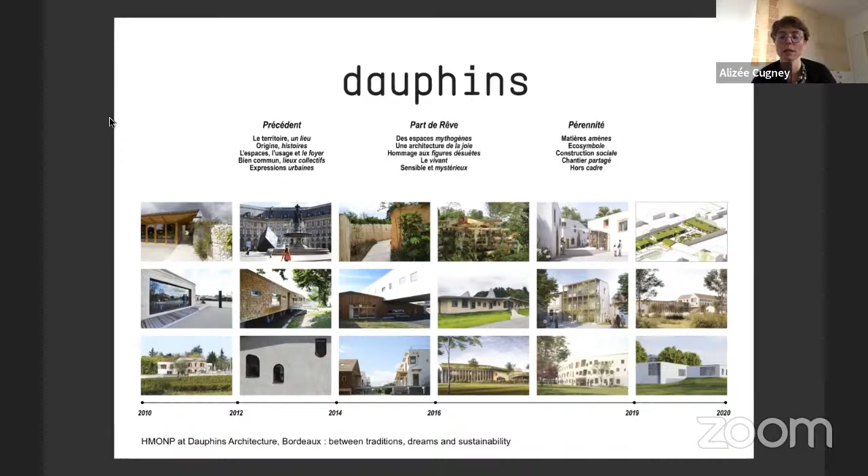So I'm going to present 3 projects. First, a participative project of an oven that is in front of this building. And then I will present 2 other projects: a town hall in Dordogne in the same region, and a building site near Bordeaux.

So this project is a social cultural center. It was made by the office, I think, 4 years ago, with some walls in rammed earth. So it's layers of earth that are compacted and cast. And then all the other walls are insulated with straw. And you have also some earth plaster or lime plaster on top of it, and also cladding on the outside, wood cladding.

And the inside is very warm. It is for students who actually live in here, who sleep in here, and who are studying just in the building in front of it. And they are studying cooking.

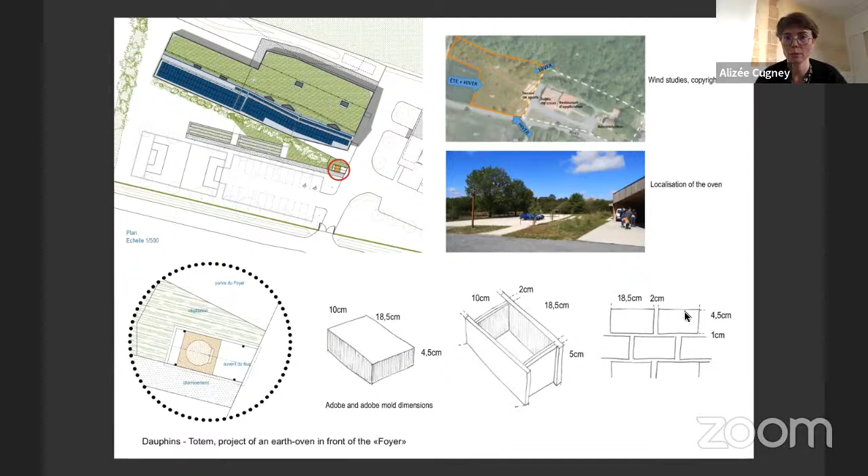So here we have some wood storage under, and then all of this is the basement in adobe, with clay bricks. Then we have a straw clay base, and then some terracotta tiles for the oven bottom, and the oven is also made in the same technique with straw and clay. So there is just a little bit of clay, just enough for the straw to get assembled and to get rigid when it dries.

And then we have the fire bricks arch for the door of the oven, and the carpentry with a shingle roof.

So for this project, we have different periods of time. So we already made the participative construction with some people who were interested in doing it. Here are some people from the architectural team. So we did together 1,200 adobes in 4 days.

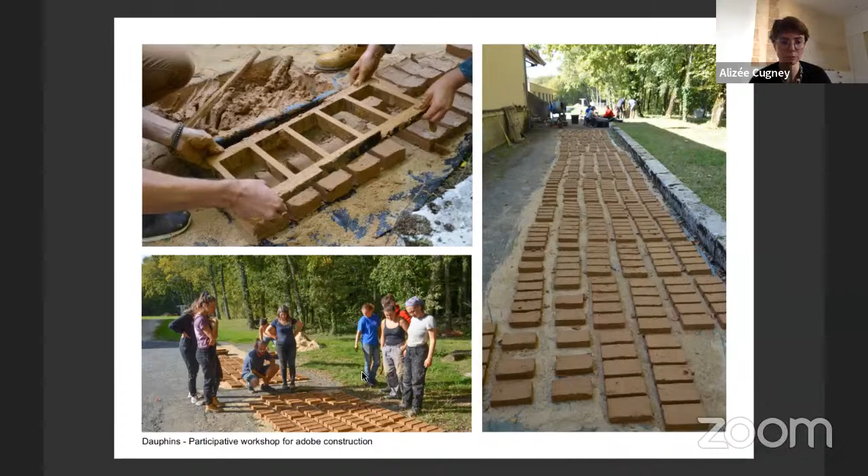And this town was occupied since the Middle Age, even when there was no town, because the monks used to sleep and live in the caves behind the abbey. So we were really inspired by all this context that was really deep and really strong. And we wanted to create an architecture that could respond to this context.

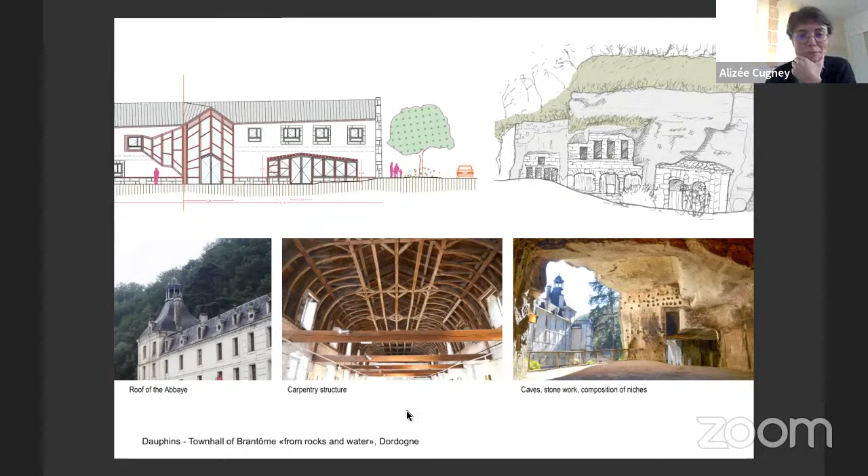So for the work of the facades, we tried to really get the inspiration from this work of the stones. So the two gables here are with stones, with some lime plaster also on it. We have also some niches for biodiversity, for animals to come, insects to come.

And on the other facades, this is the plans. So the gables are here, and on the other facades we are using the GREB technique. It's a straw bale technique with a double framework in timber, and inside you have a straw bale in layers, so you don't stop the layer of the straw bale, and then you don't have thermal bridges, and then you have some mortar on both sides of a straw bale for compression and solidity.

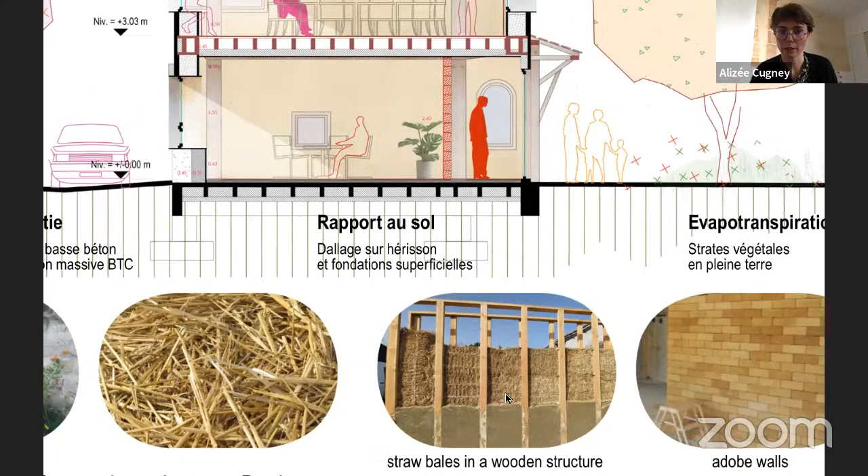But in this project, these walls insulated with straw are not porteurs. They are not load bearing. So we have another timber structure inside that is load bearing. And then sometimes inside we have some adobe walls for inertia. We're also working with natural ventilation.

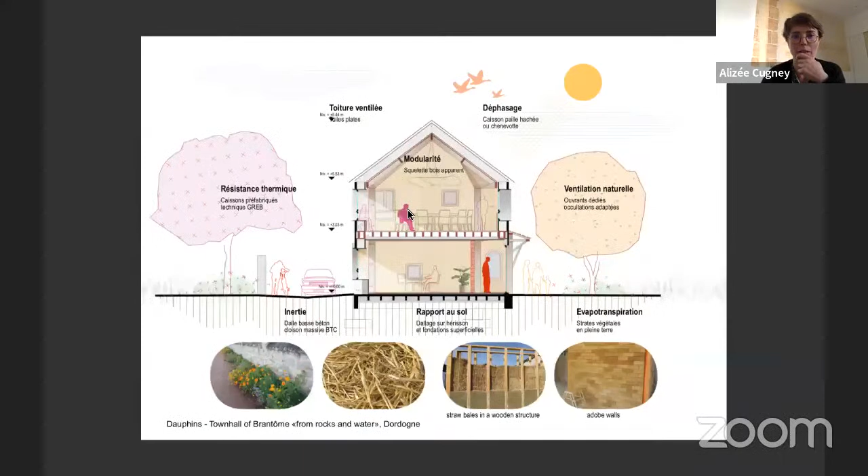So this is the work of the facades. We're using stones also on these facades for the basement and for framing the windows. And then this is a lime plaster, and on the inside we also have an earth plaster and sometimes some wooden panels.

It's also very interesting, this relation with the clients, with the mayor and the elected representatives. At the beginning we thought this project would be more in wood with wooden panels, but then they really disagreed with that, so we had to rework the facades with no wooden panels, and then have these more organic shapes, with wood in certain places of the facades.

And then we also met the ABF, the architect in charge of historical monuments in the region, and she preferred the wooden panels, the wooden structure. So as architects, you always have to find an equilibrium and a balance between all the actors around you, without losing the spirit of the project.

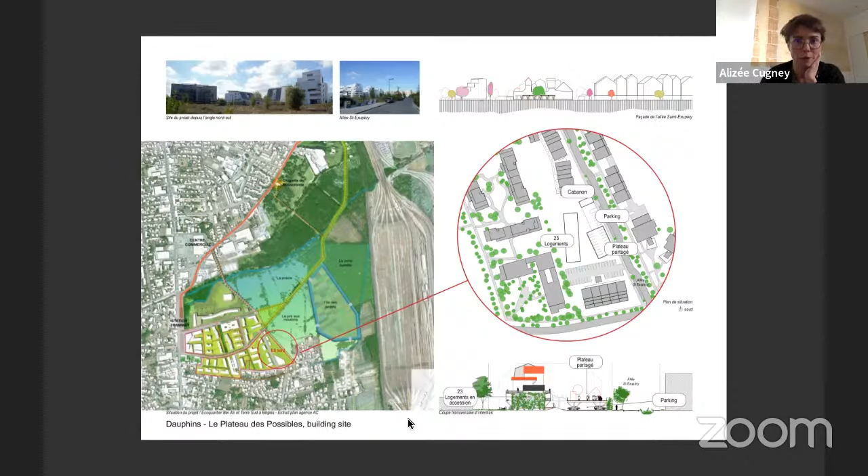And then this is a third project. This is a building site I've been following since the beginning, but I didn't work on the conception or drawing. I arrived right at the beginning of the building process.

So the idea is to have a ground floor and a first floor, very compact, with flats of one or two bedrooms. And then on top you have several houses with one or four floors. And here you have a parking lot.

On top of the parking you have a collective platform used by the inhabitants to share moments together. There's actually a budget for this place, so there are participative workshops with inhabitants to decide what they want to build there, whether a shelter or some common gardens. So it's a place of possibilities.

And here the facades with all the different colors.

You can see the quite compact plan on the ground floor, with sometimes the flats being just one layer of structure, and sometimes two layers here.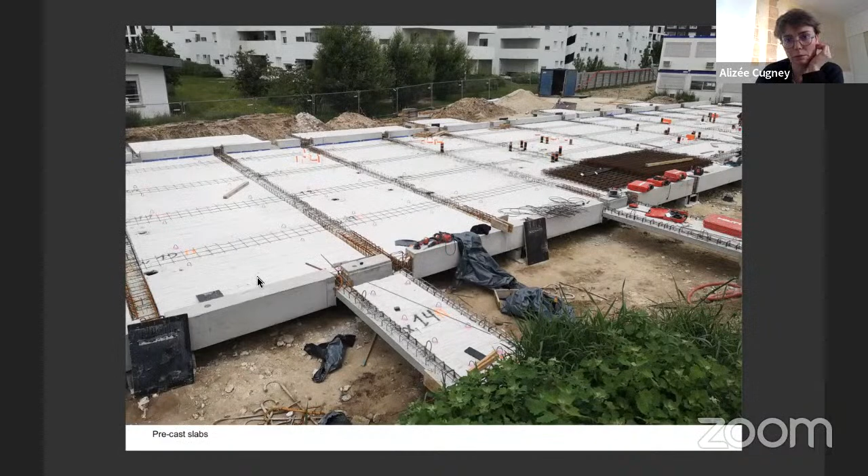So the concrete beams, then the precast slabs. In these projects, there is concrete in the foundations and in the slabs mainly. So when they poured the slab on site, you can see all the concrete environment around.

Then this was a prototype realized by the carpenters in their workshop. They were prefabricating the walls made of a wooden structure, then insulating with straw and cladding on the outside, and wooden joinery with air ventilation here.

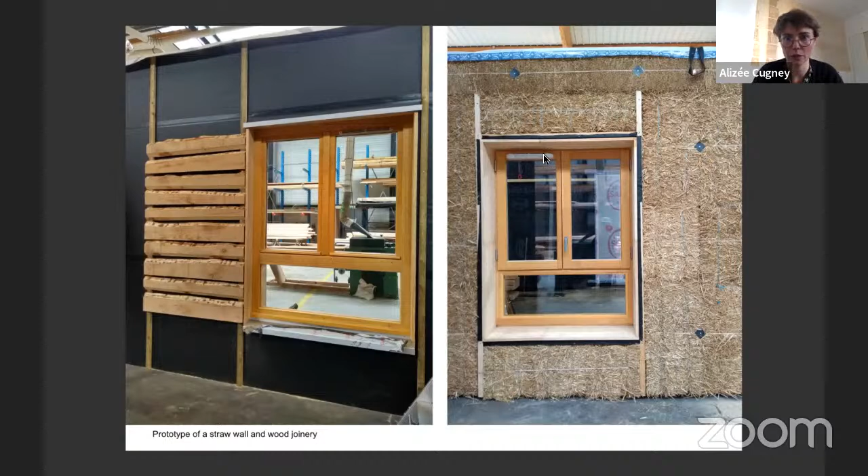Then the glue laminated framework, the wooden structure. Then the wood flooring.

And yeah, it went very fast. The crane was building — I don't know, maybe the ground floor was finished in one or two weeks. So all of this went very, very fast.

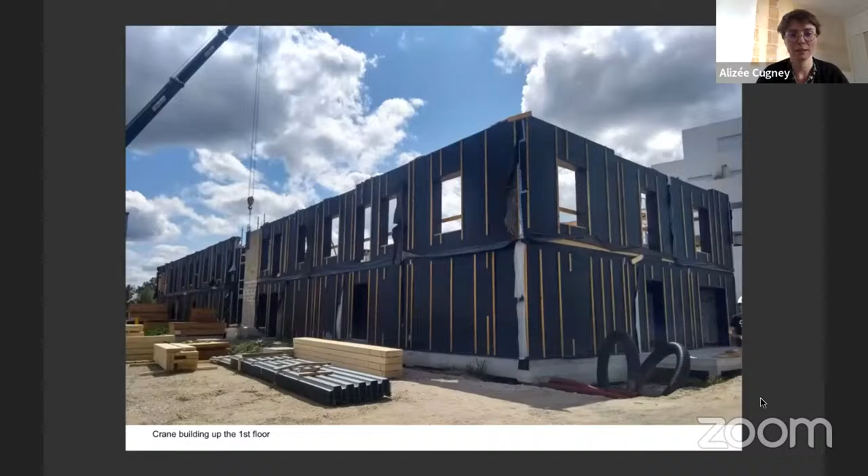You can see the crane bringing the walls directly, and this is the protection for the rain. Some walls were also arriving directly with the cladding, because this will be a coating.

And a view of the inside with the plumbing installation. We can also see that there was a lot of water leaks — it was raining inside the building, because it wasn't protected yet from the water, there were no tiles on the houses yet. So this is part of the building process.

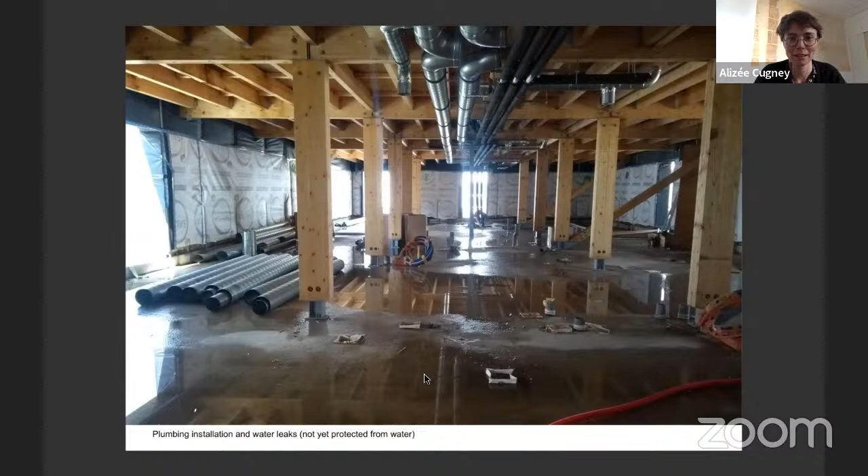So now the volumetry of the project with the tiles that were here, and then the balconies and the passageways and the stairs, and a test of cladding that was disapproved by the town hall. So we had to change the whole cladding of the ground floor and second floor, ground and first floor.

So the walls were arriving protected, but then to clay plaster it, they had to remove the protection.

So this was the ambience inside of a building. It was very funny to see all this, all this straw appearance.

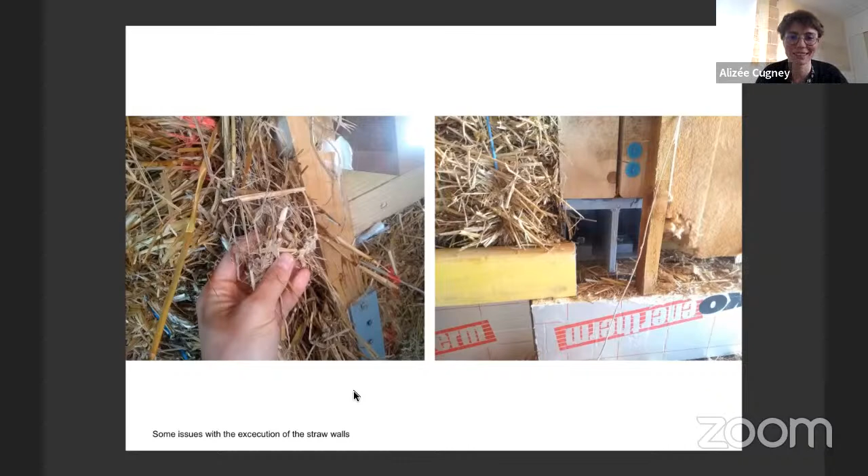So then they applied the first coat of clay plaster. It comes after a preparatory layer - straw that is projected on the clay, projected on the straw, and that gets inside maybe 3 centimeters of the straw bale to create a kind of hook, and then you can put the first coat of clay.

This coat is still drying now, so it's been maybe more than 2 months, but they did it really at the worst moment, and so there's some mold that appears because December is really not the good period to do clay plasters. So sometimes you can see the disadvantages of working on this kind of big scale project and having all these deadlines to respect, but you also have to respect the time of the material - the clay needs time to dry, needs the good conditions.

So you need to work with all that. But now it's drying more and more, and the mold is not dangerous at all. So it's okay.

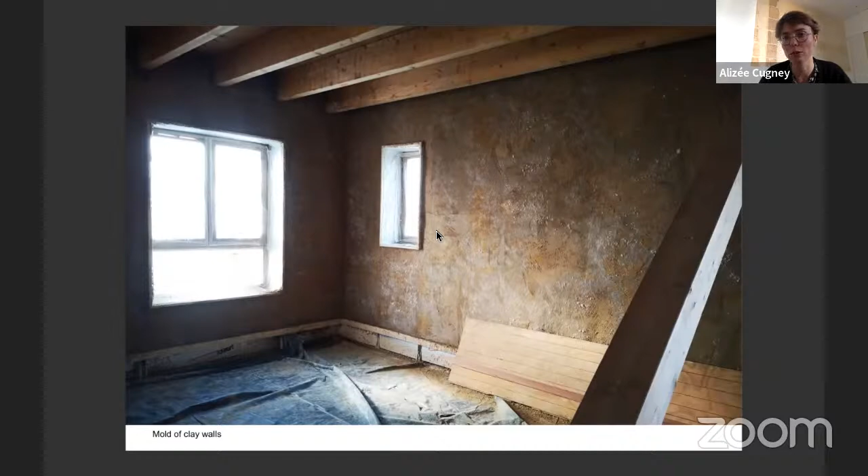And then the metal framing for the placo inside of the houses, also for the ceilings. I forgot to say, the ground floor and first floor are insulated with straw bales, and then the houses are insulated with wood wool. So it's 2 different kinds of insulation.

And so we can see here the cladding of the ground floor that they started again - they changed it. And the outside coating with the outside insulation, and with colorful facades.

Thank you, Alizée. I changed a bit what I thought I would be doing, Mathieu, because I was a bit bothered to talk about some of the projects of the architecture agency where I work now, since I mainly work on architecture competitions until now. So it was a bit strange to show you synthetic, artificial images of things I did. I thought it wasn't really the best idea, so I prefer to show you built projects from friends, but they are all in Paris or in the really near suburbs, because Mathieu told us he was really interested in urban projects.

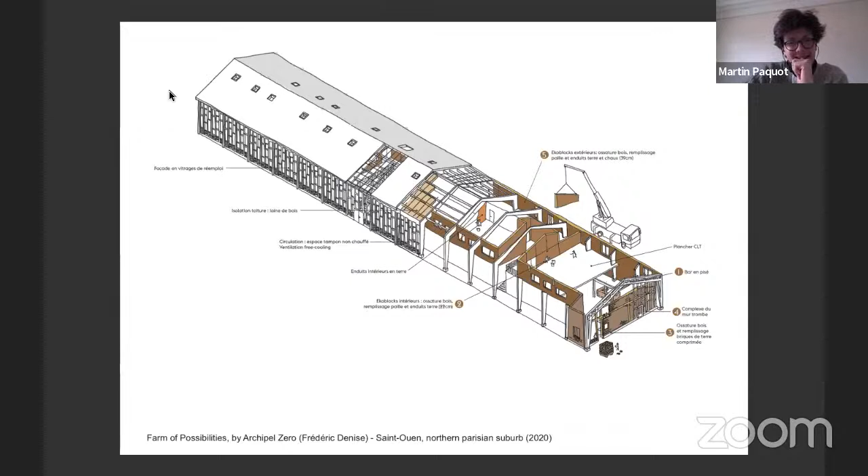It was put on by a lot of volunteers, like hundreds of volunteers every weekend. It was really, really huge, really joyful also. And a lot of architecture students came and put their hands in the mud and everything.

I did it a couple of times. It was really great, and you meet a lot of people also, and you can do stuff with them afterwards on other projects. It's really nice because we were all kind of students or just newly graduated, so you can maybe start a business together or do projects together. It's a really nice way to meet people also. I think this kind of social event on the construction site is quite important, especially in this kind of eco-construction way.

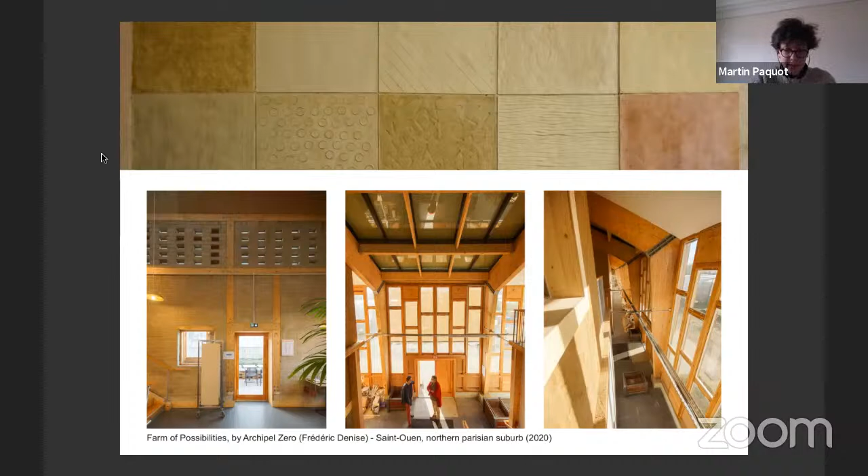The next project is also kind of a farm, but this one is in Paris. Really, you can see the building all around it. It's a bit smaller and a bit more complicated because you have a railroad just in front. It's not in use anymore, but it's still there, and you have to go under the railroad to access the building, so it was a bit tricky during the construction.

In this, you have 2 buildings. On the one on the left, you have a restaurant on the railroad, and on top of it, a greenhouse where they grow stuff, and above that, a mushroom farm also. In the building on the right, you have housing, social housing, partly for students in horticulture who live there, I think 4 of them, and also 16 people who were previously homeless. It's really an innovative project in the way it's built with materials and everything, but it's also a really social project.

The finality is to provide shelter for previously homeless people, but also to provide them work. They take care of the garden in front, on the roof also, in the greenhouse and everything, and they are trained to do that. That's also why you have housing for students, because they are training in horticulture studies, so there is also a kind of sharing of experience between these two different groups.

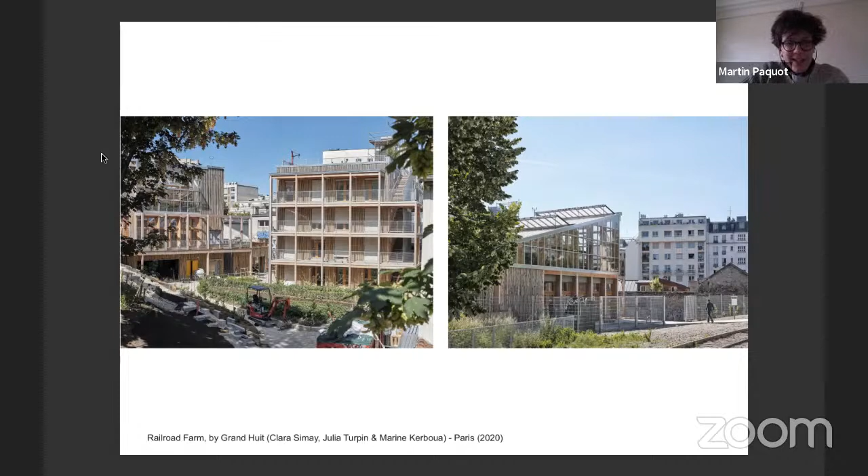It's 12 classes for children from the age of 3 to 10. The main particularity of this project is that the architects and engineers who work on it are integrated into the city hall, like public servants. They are not private offices of architects and engineers, they work for the city to design and build the school. So it's kind of another way of doing stuff, and it allows them to experiment more and go deep on every subject.

For instance, the structure is a wood structure. You can see it there, but it's not glulam or anything, and it's not a private house, it's really a big school. Nevertheless, it's made with solid wood from the region for a large part, oak actually, and the building is 12 to 15 meters high, so it's quite huge. You have a bearing of 8 meters between posts, so they made a lattice beam to cover the length they need.

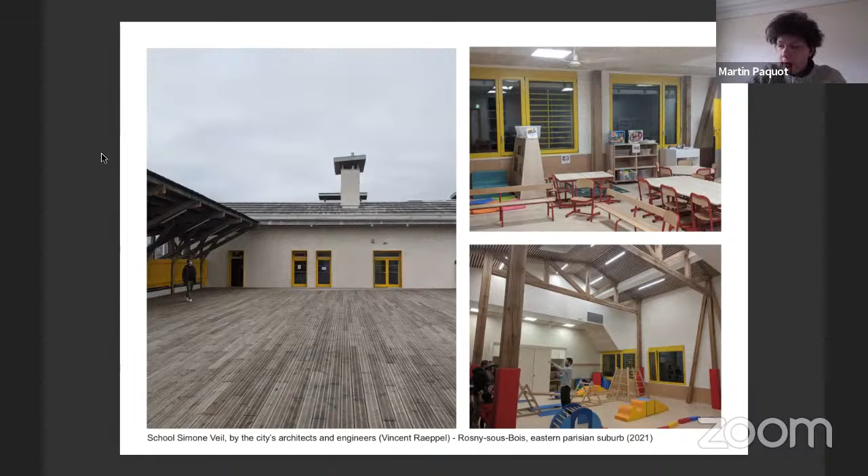They did a great thing there, and they are really leading and guiding everybody because of their unique structure of working directly for city hall. I think there are a few pictures left, or I don't remember.

Yes, great. This one is a bit different. It's in Paris, and I saw that Charles finished his expose precisely on rehabilitation, so this is kind of experimental rehabilitation. There isn't plenty to see, the picture isn't amazing, but it's a public housing project. You can see it before and after on the picture. It's kind of a gable wall, with just a few small windows.

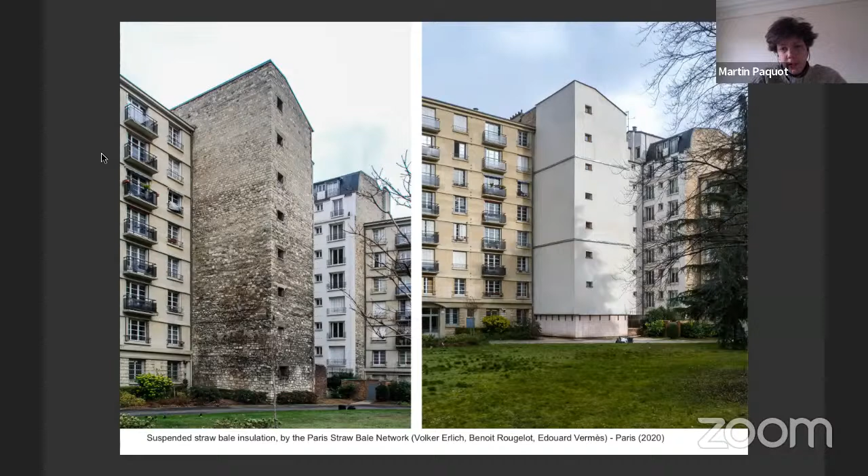They're bathroom windows, really small. With the straw bale network and a few architects and craftsmen, we tried to find a new way to insulate with straw, and also a new way to put the straw on the wall with less wood. The usual way, you make a wood frame, like the same carpentry you'd use for shelves, like in a library. So the idea was to use less wood, and maybe it will be clearer in the next picture.

There's a kind of drawing to explain it better. So actually, no, it's the end.